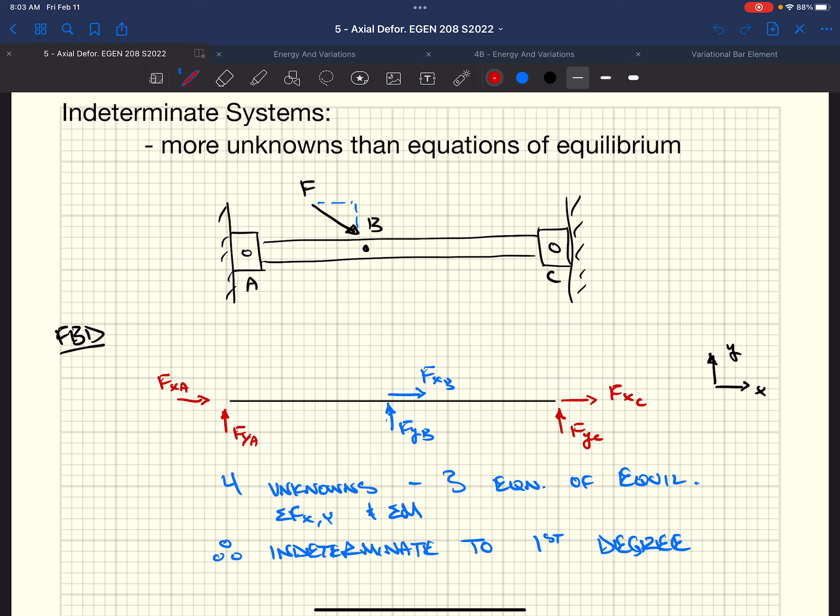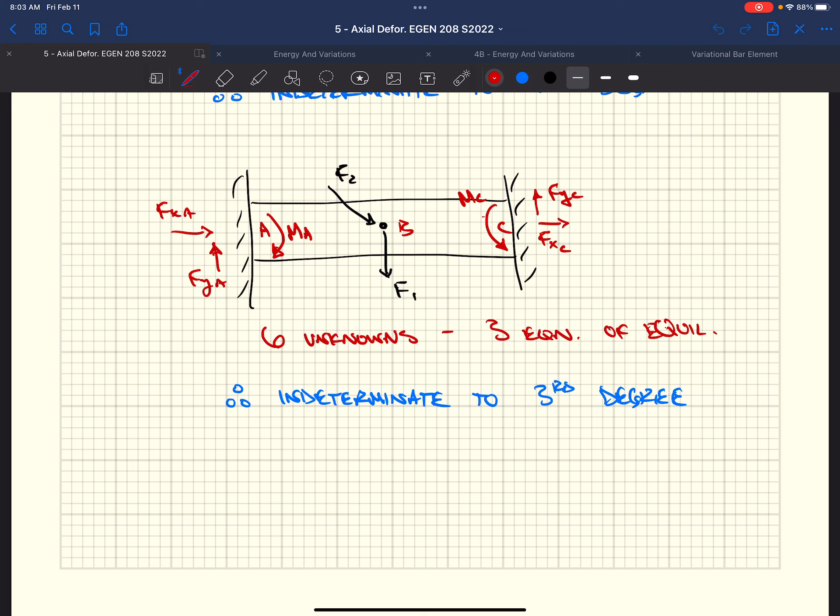To continue with what we were talking about on Wednesday, we started discussing indeterminate axial systems. We have more unknowns than equations of equilibrium. When we set up our free body diagram, we have more of our red arrows, our unknowns, versus our knowns, which are our blue arrows, our applied forces. When we have more unknowns than equations of equilibrium, we need a process to establish what these forces are. If we have 3 equations of equilibrium and 6 unknowns, we need additional equations so we can develop our unknowns.

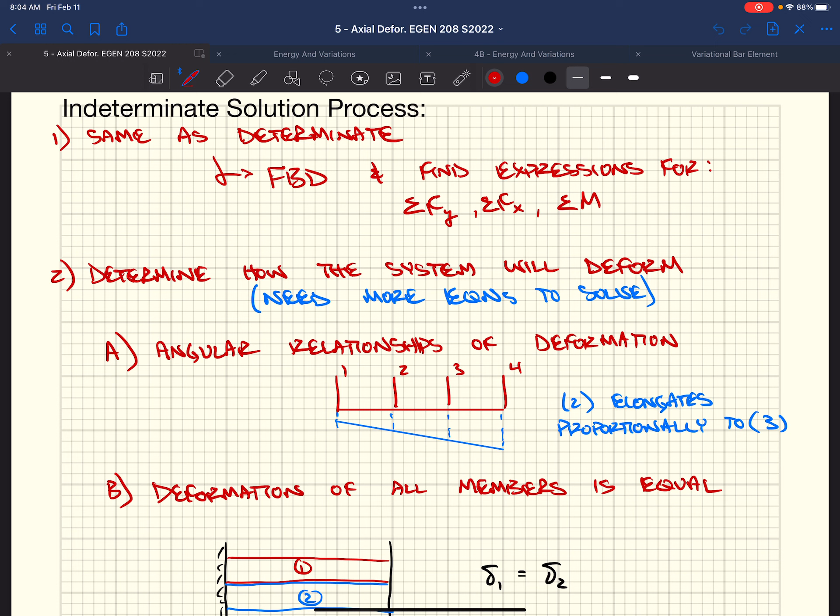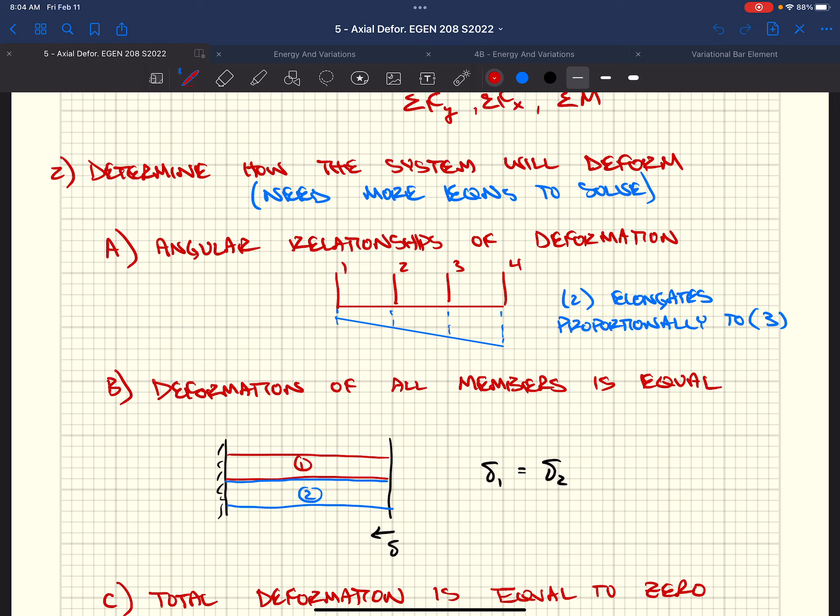So this solution process always starts with a free body diagram. We need to establish whether our problem is determinate or indeterminate. How we develop these additional equations is by coming up with relationships of deformation, because we have our force-deformation relationship equation, relating the deformation of an axially loaded element to force, geometry - length and area - and modulus of elasticity. Depending on how that rod system is set up, we can come up with relationships. If we have a rod system, we can come up with angular relationships of deformation. As each of those rods, 1 through 4, elongates, we can relate how one rod elongates versus another. If we know that deformation relationship, we can plug it into our force-deformation relationship equation and relate forces to one another.

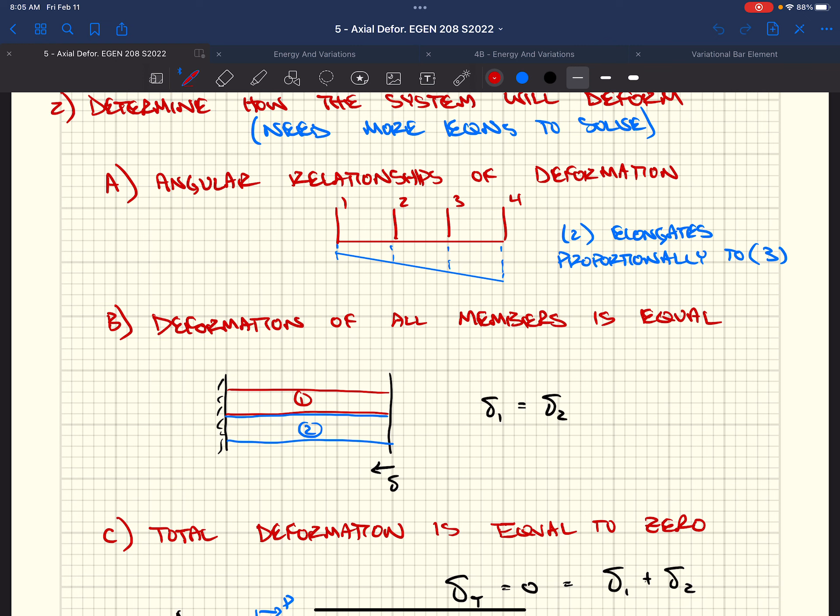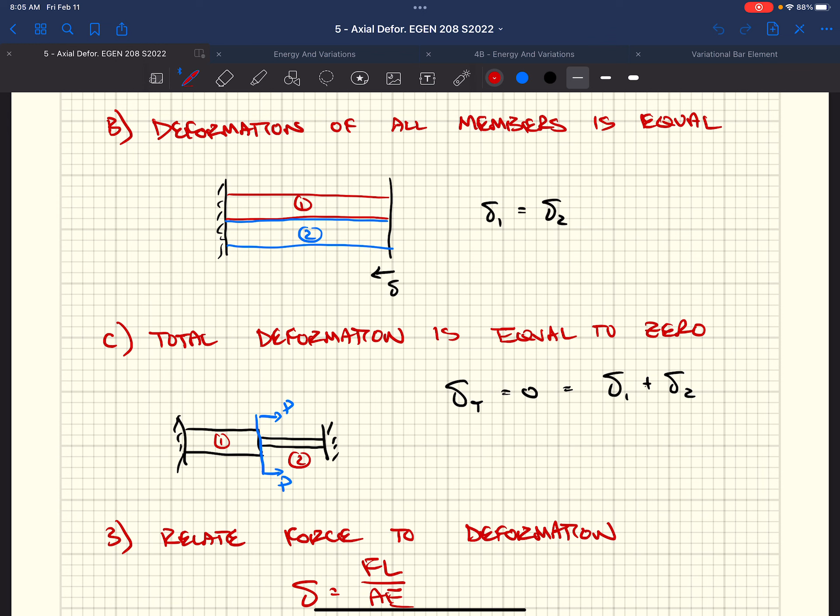Deformation of all members is equal if we have 2 elements in parallel. They might be of different materials, but they're attached to the same end plates and beginning plates - if one deflects a certain amount, the other deflects the same amount. If we have a series of rods at 2 fixed supports, and these rods were connected at a point, and we add load at that point so it moves, the overall dimension stays the same. So we know the overall change in deformation has to be 0.

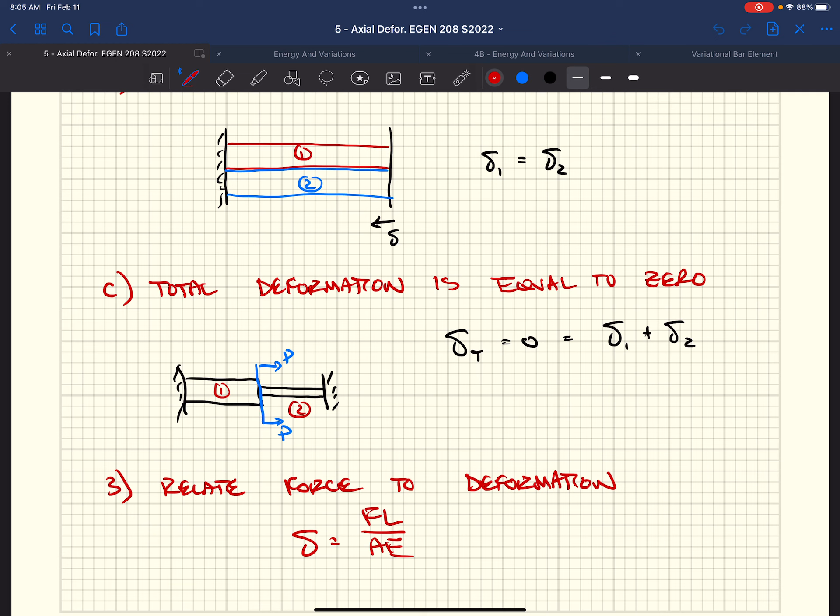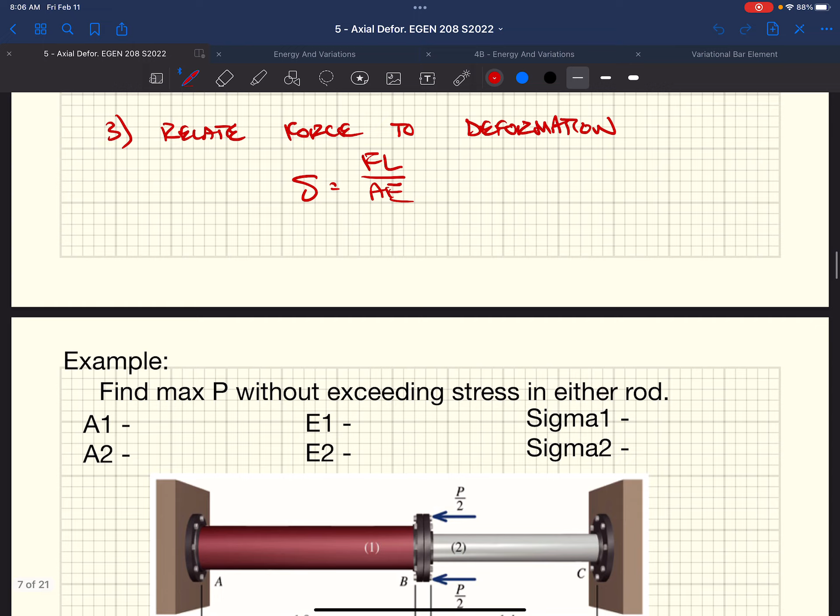If we move to the right 1 unit, our second rod gets smaller by 1 unit, but our first rod has to get longer by 1 unit, so our total deformation is 0. Once we know these relationships, we can plug them into our force-deformation relationship equation and come up with additional equations so we can solve for all our unknowns.

So this is an example - we've got two rods, just like the last one we looked at on the previous page. We have a series multi-segment rod system. The areas they're giving us are 3,600 millimeters squared and 2,000 millimeters squared.

They told us that our modulus of elasticity for our first rod is 200 gigapascals, and our second rod is 70 gigapascals. Well, that means our second rod is about a third as stiff as our first rod.

Then they said they're giving us some limiting stress. It says find the maximum force P without exceeding the stress in either rod. Well, the stress in our rods needs to be 160 megapascals in rod 1 and 120 megapascals in rod 2.

So if we establish a free body diagram, first step in our process. Don't know if this is determinate or indeterminate yet. Just gonna break out the system, put in our known and unknown forces. Well, our known forces are just really our force P, or P over 2 times 2.

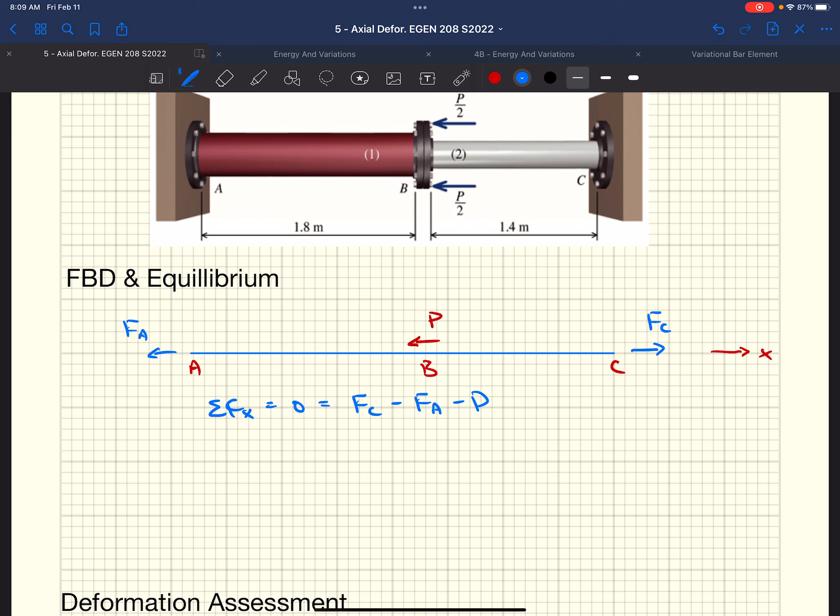They're all acting along the same line, so none of them have a moment arm, so none of those equations help us. So we get one equation of equilibrium, sum of the forces in the x. Well, I assumed that FC was off to the right, which is our positive, so it's positive. I'm going to subtract FA, because I assumed it went to the left. And then finally, I'm going to subtract P, because I also put it to the left, because we knew which direction P was acting. They give us what that direction is.

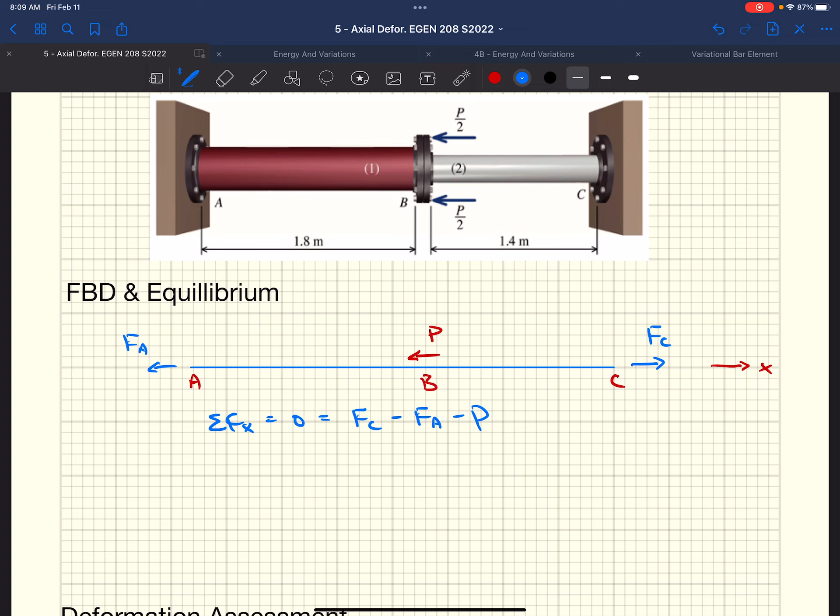Well, we have two unknowns, one equation of equilibrium. This problem is indeterminate, and it's indeterminate to the first degree.

We need one more equation, and we could solve for our forces. We need two equations for two unknowns.

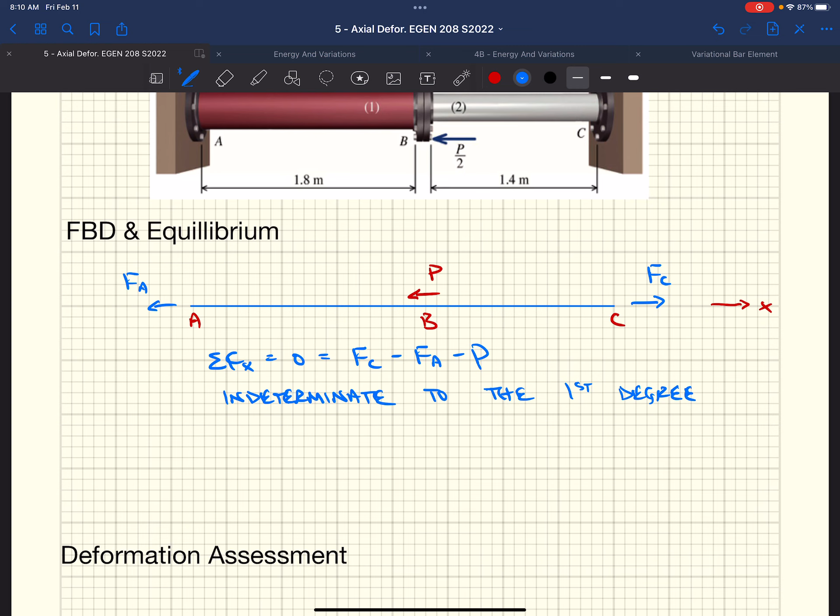I'm going to make a substitution and say FC, I'm going to just call F2, that's the force in rod 2. If I were to just, we took this out of the supports, so really this is rod 2 on the right-hand side of our applied forces. This is rod 1. So really the internal force in rod 2 is FC, and the internal force in rod 1 is FA.

Well, if we follow our solution process for indeterminate systems, we need additional equations of equilibrium, based on that list in your notes. Anybody come up with an equation that they would use to relate the deformation of our two rods in this system? Any ideas? Yeah? Yeah, exactly.

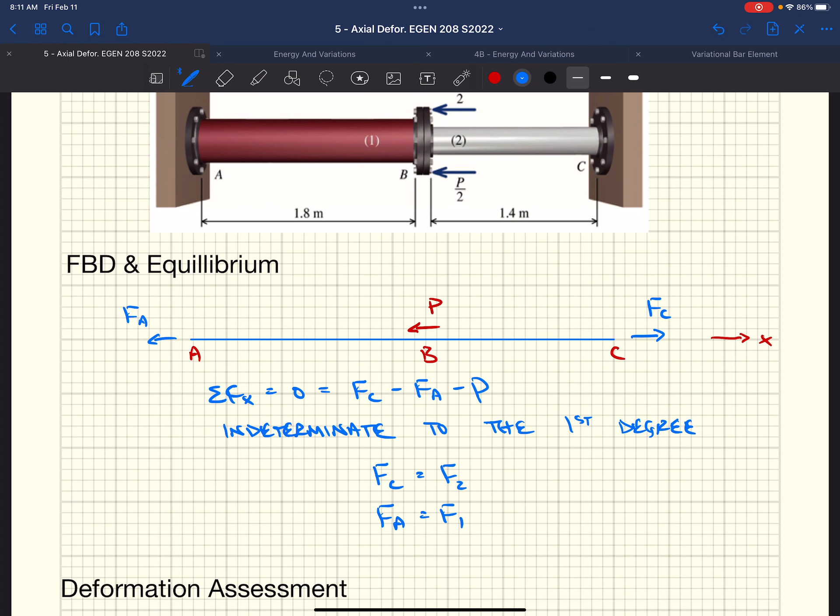Right, the total deformation has to equal 0. We have fixed end supports. So we know that our behavior of our system needs to act something like this. If that plate moves to the right, because the end plates aren't moving, member 2 is going to get smaller. Well, member 1 is going to get just as long, it's going to compensate for that loss of length in the second member. So if you add those together, we're going to get 0.

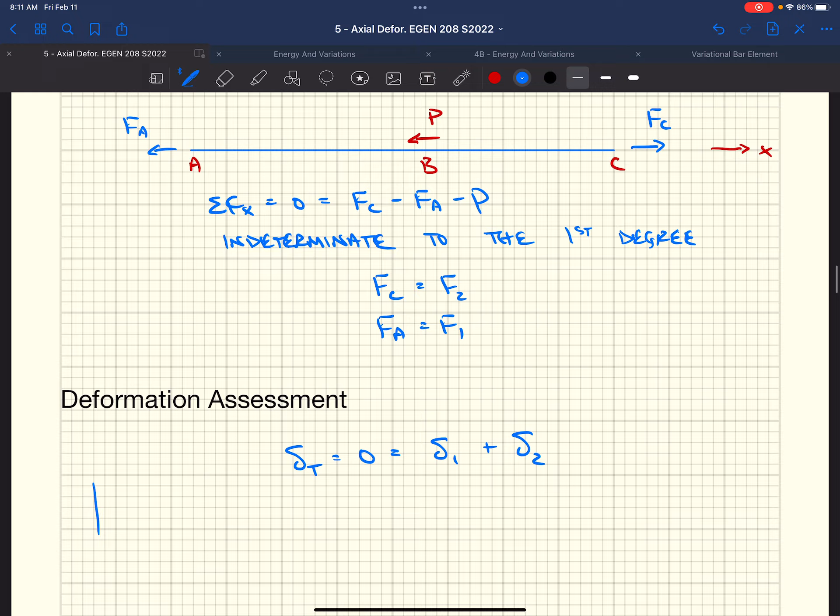So essentially, this thing going on, fixed supports, got some load P. This right here is a constant. What does that mean? Well, the total system change in length has to be that constant. That constant is 0. It's got to be 0 because it's not going to change length overall.

Well, what does that mean? Well, if we were to rearrange this, we could say that delta 1 is the opposite of delta 2. We just took delta 2, subtracted it to the other side. We'd get delta 1 is negative delta 2.

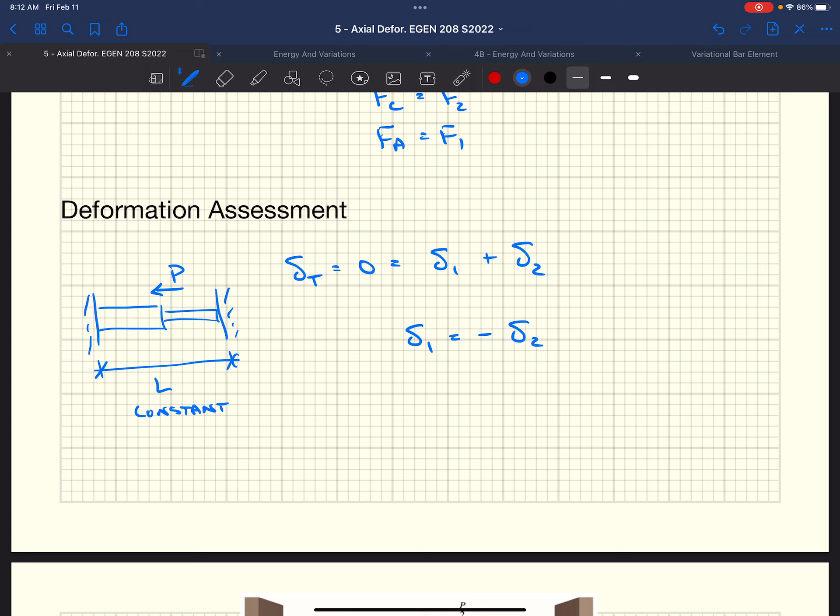Well, when we use that, now we have this relationship of deformation between the two rods. Well, we also have the force relationship to deformation of each rod. We have delta 1. Well, delta 1 is the same as saying the force in 1 times the length in 1 over the area of 1 times the modulus of elasticity of 1.

Similarly, we have this same relationship with respect to member 2's cross-sectional geometry, material properties, and internal forces.

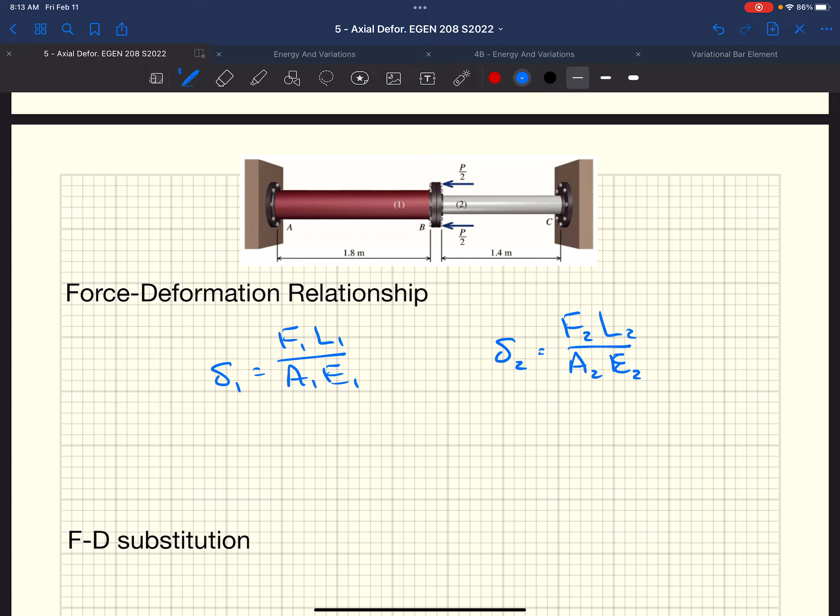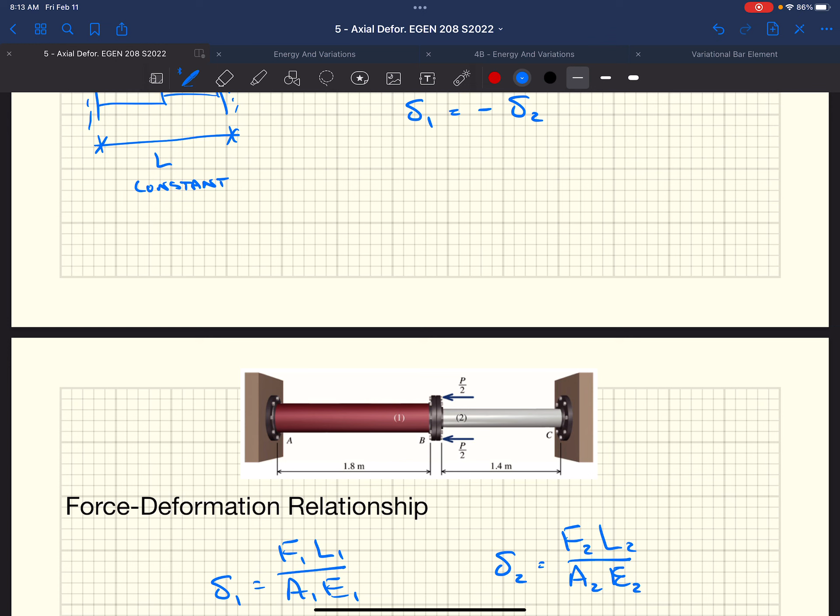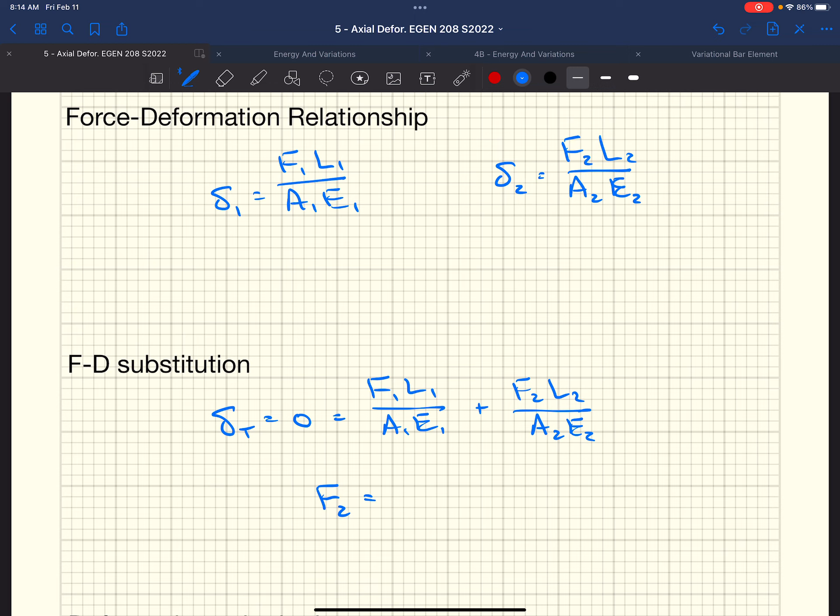Well, we have delta 1 equals negative delta 2. Well, we have delta 1 and delta 2 in terms of forces and known other parameters. I'm just going to make that substitution. I'm going to say delta total is equal to 0. Well, that's F1, L1, A1, E1 plus F2, L2, A2, E2, or if we rearranged it the way we had it, and then substituted or just rearranged as a whole for F2, one of the forces.

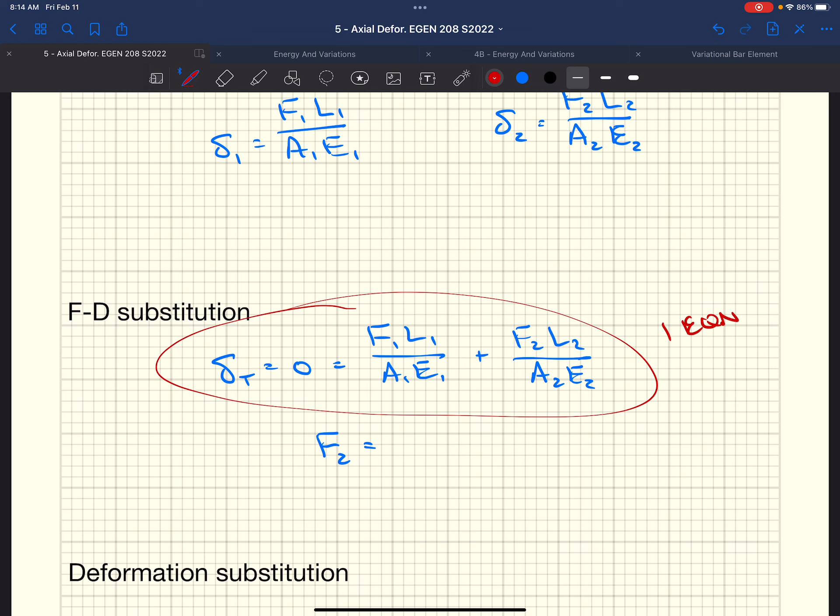This right here gives us an equation in terms of unknown forces. So this would be one equation with two unknowns.

This is our other equation with two unknowns. We know FC is F2 and FA is F1. So now we have two equations and two unknowns.

I'm going to solve this equation for one of my unknowns: negative F1, L1, A1, E1, multiplied by E2, A2 over L2.

Now that we know one force in terms of the other, based on our deformation relationship, we can substitute that force 2 back into our equilibrium equation that said our sum of our forces in the x equals 0, and that was negative F1, or F sub A, plus F2 minus P.

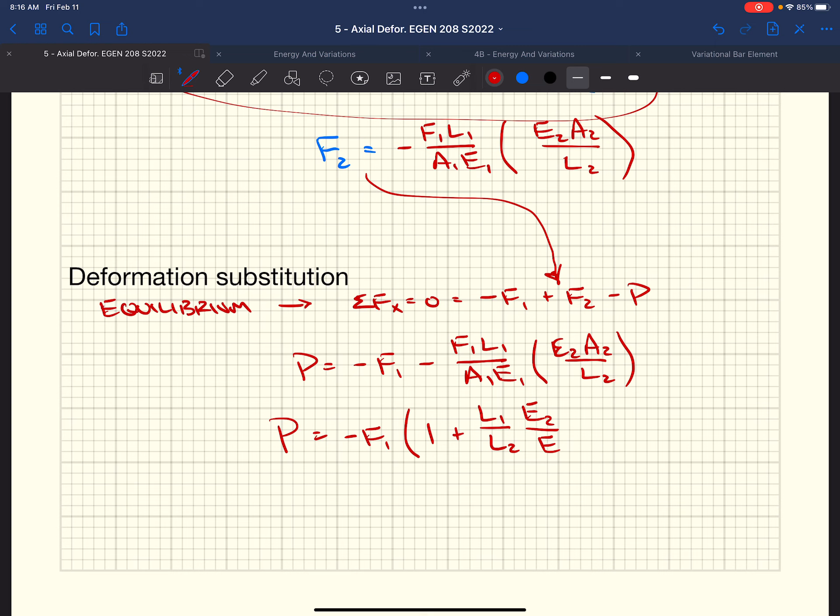Well, if we take this and plug it into there, do some rearranging, we get P equals minus F1 minus F1, L1, A1, E1 times E2, A2 over L2. Could simplify this a little bit more. Negative F1 — I'm going to pull all the F1s out: L1 over L2, E2 over E1, and finally A2 over A1.

We know our applied load. We could get our applied load based on knowing the force in one and our geometry of each of our rods, our material properties of each of our rods, and the cross-sectional area of each of our rods.

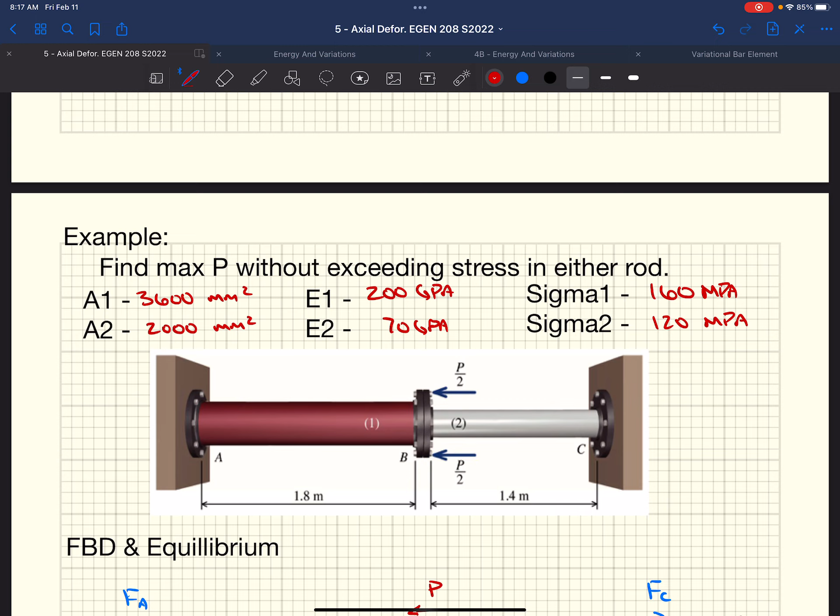Well, they didn't give us P, right? They said, what is our max P without exceeding the stress in either rod? Well, what is our equation for stress? Stress is force over area, right? It's never going to change.

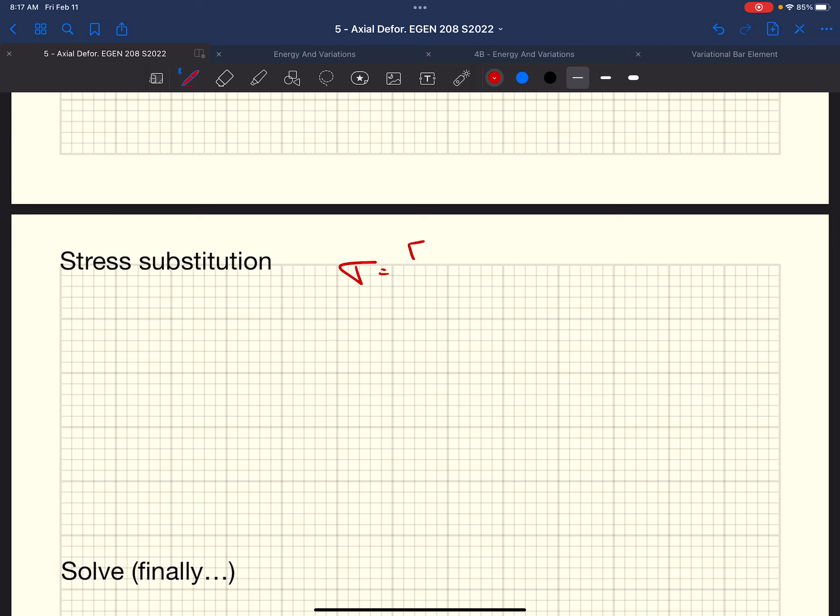This is a safe space. You can be wrong, I can be wrong. I'm wrong all the time, okay? Stress is force over area, right?

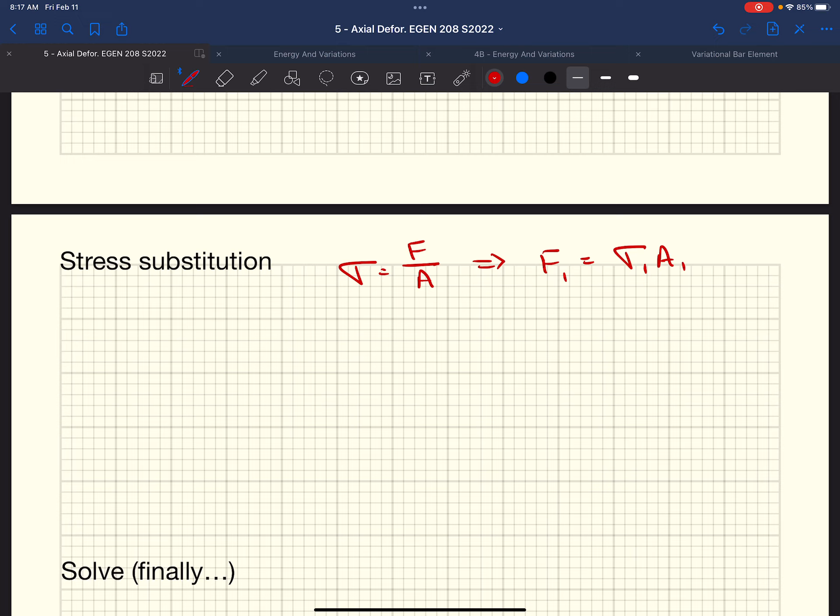So they gave us stress. We know the cross-sectional area. The only thing in that equation we don't know is force, so I'm going to rearrange for force. If we're looking at rod 1, the force in rod 1 is going to be the stress that we are limited to in rod 1 times the area of rod 1.

If we look back up here, I conveniently rearranged this so that I could take this quantity, stress 1, area 1, and just plug it in for F1. Put it up there, and create an equation in doing so. So P equals negative stress 1, area 1, or F1 — that's all that is, F1 — times that big glob of stuff.

Something like that, right? It's A2 over A1, yes, A2. Okay, well, we know everything here. We know everything on the right-hand side. We can figure out now what force we can apply where we will not go beyond — we're going to be sitting right at the maximum stress in rod 1 or member 1. So let's plug that in.

At this point we've got to start thinking about units. There's a lot of units going on in this equation on the right-hand side. We know what we want to get out is a force, so that's going to be in pounds, kips, in this case newtons, or kilonewtons, since we're in SI. So we just want to make sure we follow our units here.

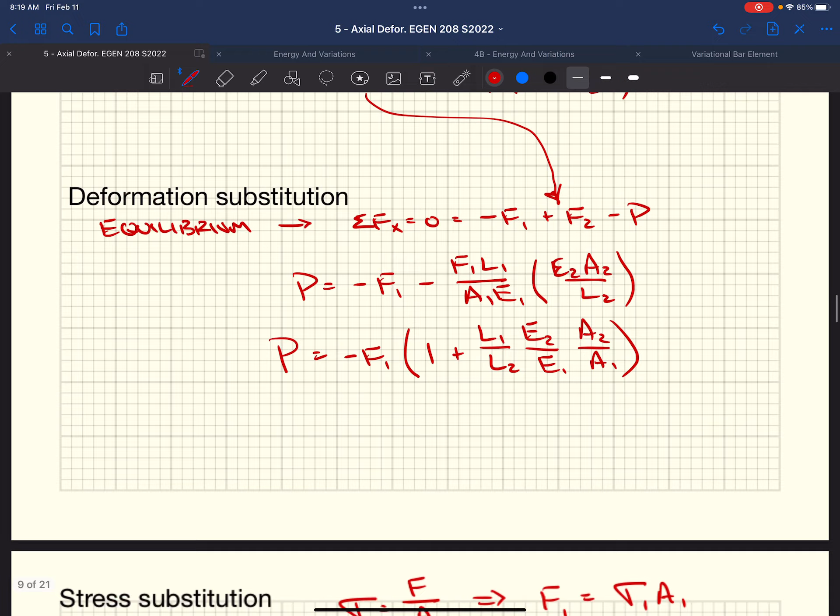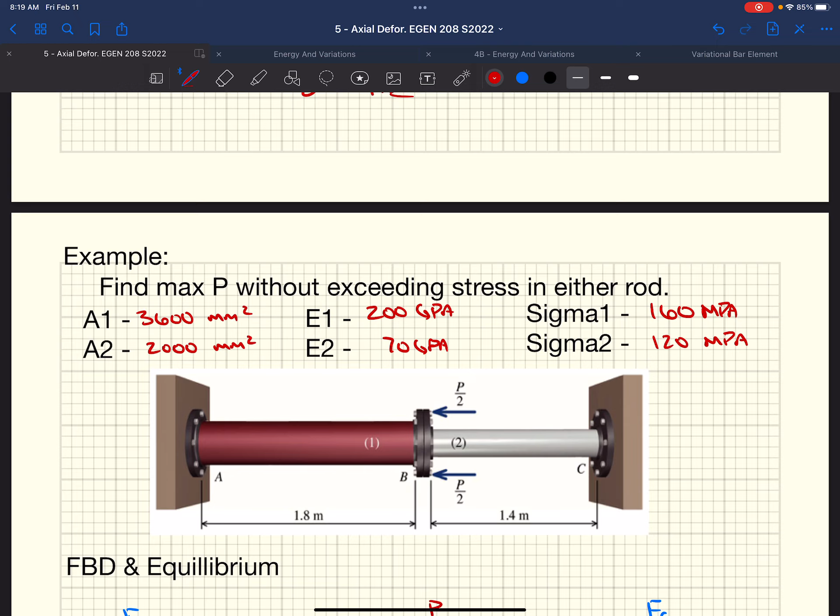Well, they told us it was 160 megapascals, 200 gigapascals, and an area of 3,600 millimeters squared — also rod 1. The length of rod 1 is 1.8 meters.

So we have 160 megapascals. Well, we know megapascals is newton per millimeter squared. We know the area that we just said was 3,600 millimeters squared. Then we've got this big mess of stuff — we've got the length of rod 1 over rod 2. It's 1.8 meters over 1.4 meters.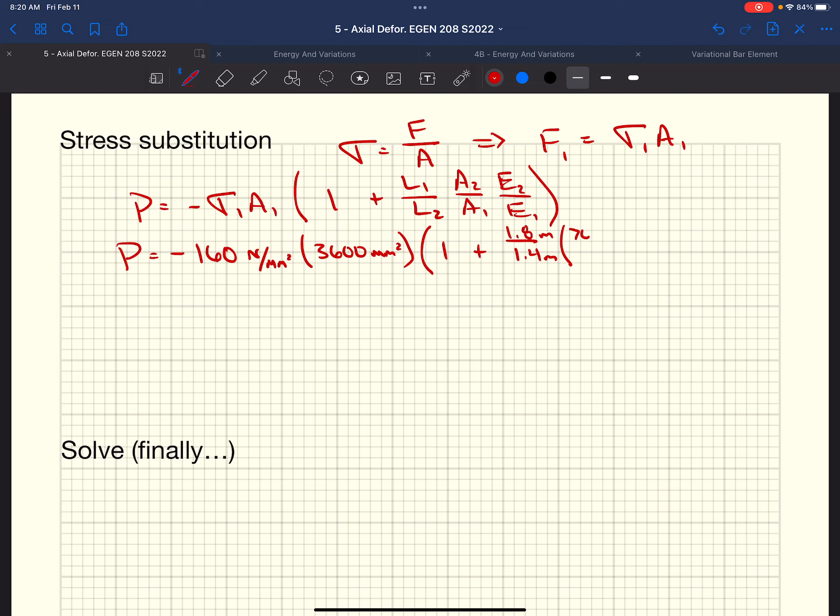And then we've got our E's. We have 70 gigapascals, that is the modulus for rod 2. And then finally the area — again, got to remember that it's area 2 over area 1, so it's 2,000 millimeters squared over 3,600 millimeters squared.

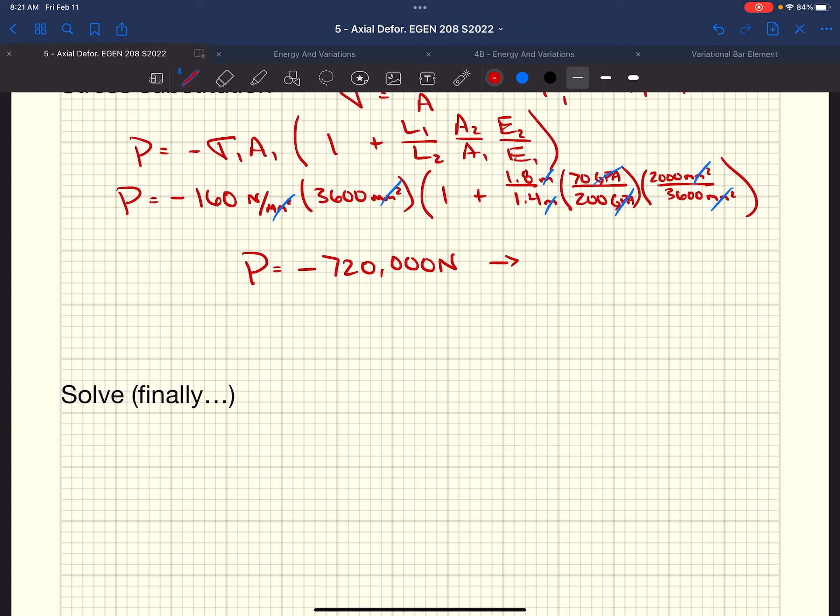If we look here, all of our units cancel on our L's, A's, and E's. If we look over here, megapascals is a newton per millimeter squared, and we had area in millimeters squared, so we were able to cancel those out. So our answer we're going to get is P equals negative 720,000 newtons, or negative 720 kilonewtons.

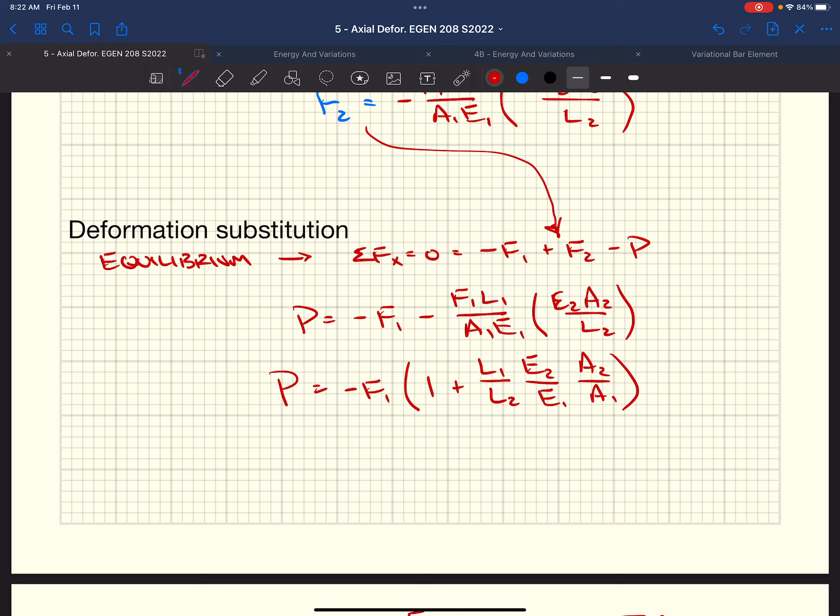Well, just like we did up here where we rearranged an equation that related P with respect to the force in rod 1, we can do the exact same thing.

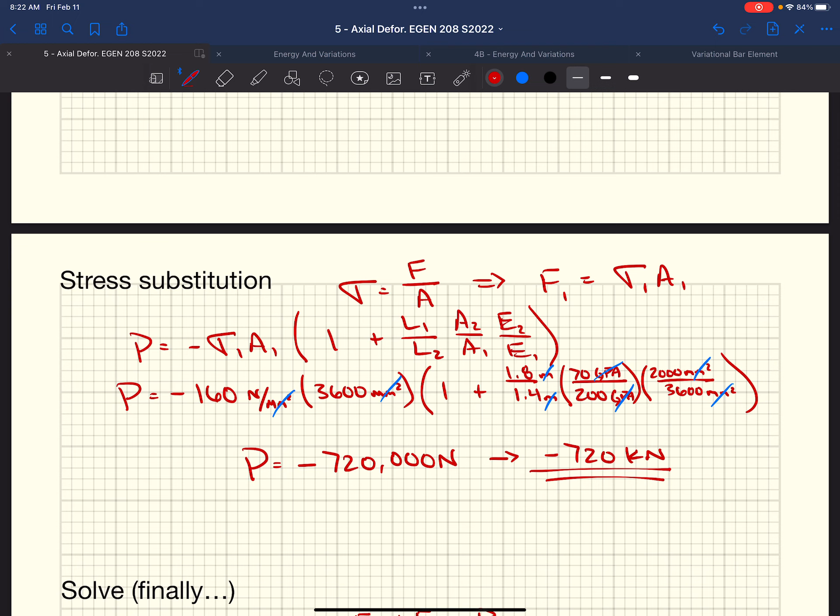Sum of the forces in the X equals 0 equals negative F1 plus F2 minus P. All the negative means is that our original assumption of direction is actually wrong, right? P is actually opposite with respect to the direction of force in rod 1. If we apply the force P that heads this way, both of these reactions should have gone this way. So all that's saying is that the direction we assumed is actually opposite of the actual direction relative to the applied load. That's why that's negative.

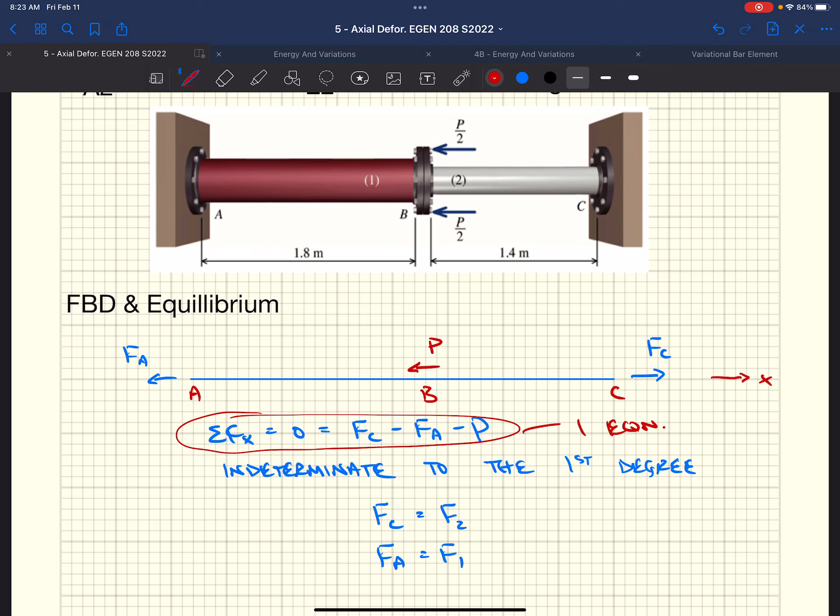So we have F1 now, based on this equation, F2, L2, E2, A2, times E1, A1 over L1 -- just based on rearranging that equation. P is F2 times L2 over L1, E1, E2, A1, A2 plus 1.

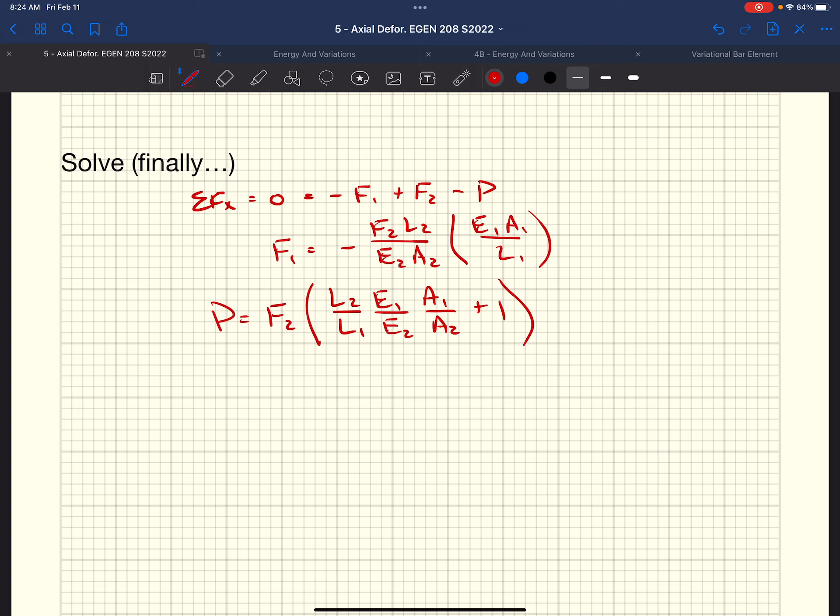And plugging all that in, which I'm going to save you guys the pain of doing, we get 1.2 million newtons, or 1,200 kilonewtons.

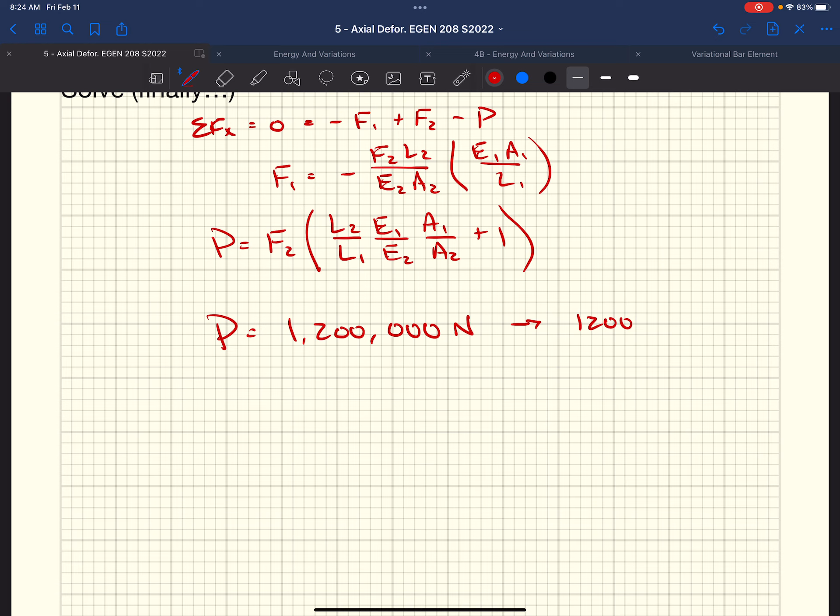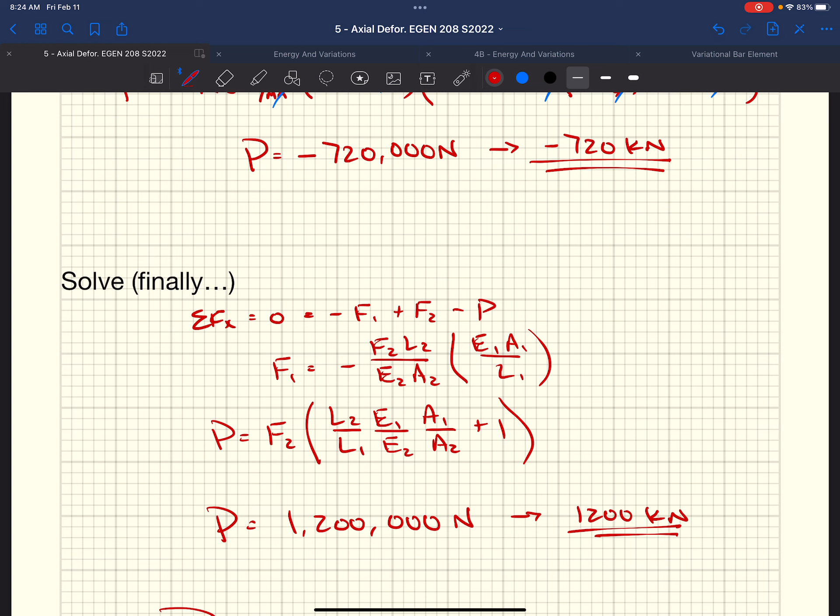It's positive. What does that mean? Well, the direction that we assumed in our initial free body diagram, all that means is we assumed the right direction. Based on this, if we put P to the left, that reaction at 2 is to the right. Based on this, they asked us for what's the maximum P that we could apply to reach our stress in each of our rods.

Which out of these two, what would be our P that we would use? 720 kilonewtons -- that is our limiting value.

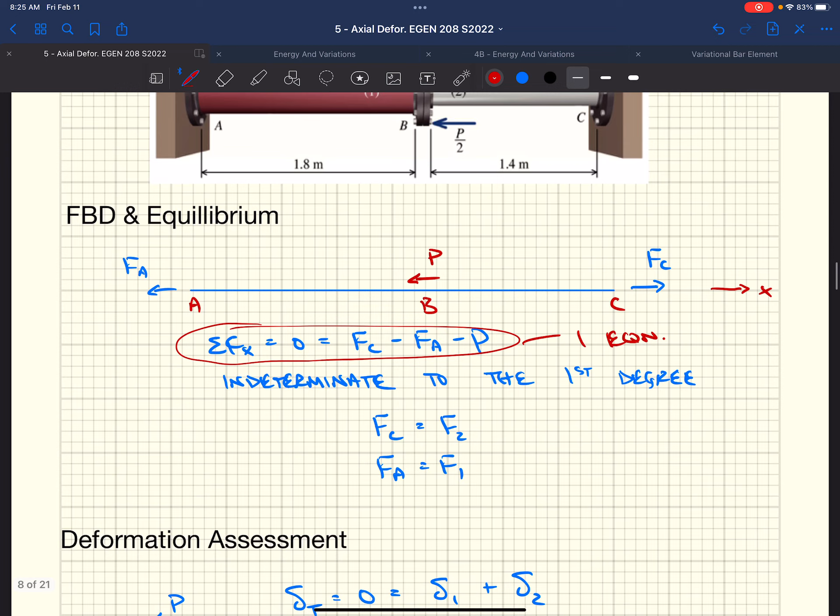That is our limiting applied load. If we started at 0 and slowly increased that load, at some point we're going to hit the limit, and unfortunately rod 1 is our limiting rod where we would hit the stress. We're going to hit 160 megapascals first in rod 1 -- essentially failing this member before we get rod 2 to its 120 megapascals.

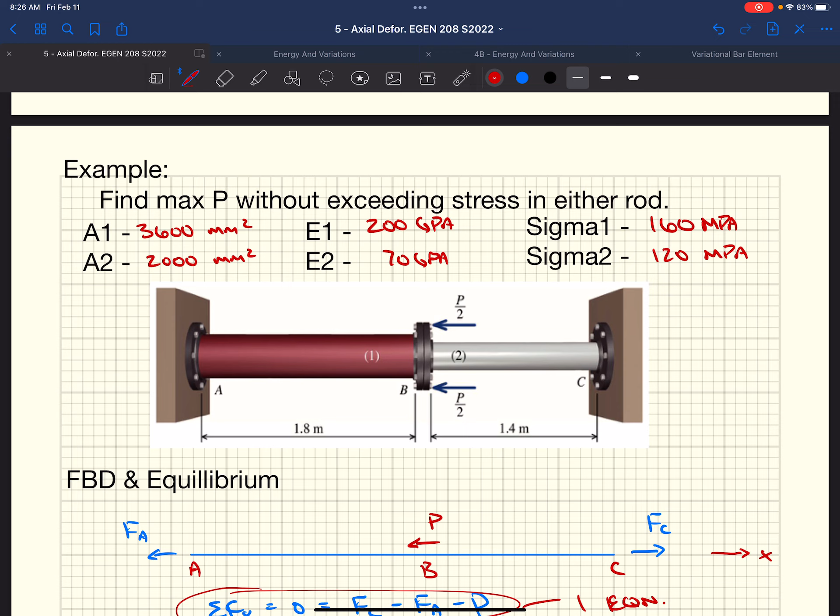Looking at this, rod 1 is larger than rod 2, but it's the fact that rod 1 is stiffer that really plays a huge role -- as you push on it, it's going to attract load 3 times as fast as rod 2 would, because it's stiffer. So for every 1 unit of deformation, you're going to get 3 times as much load in rod 1 as you would get in rod 2.

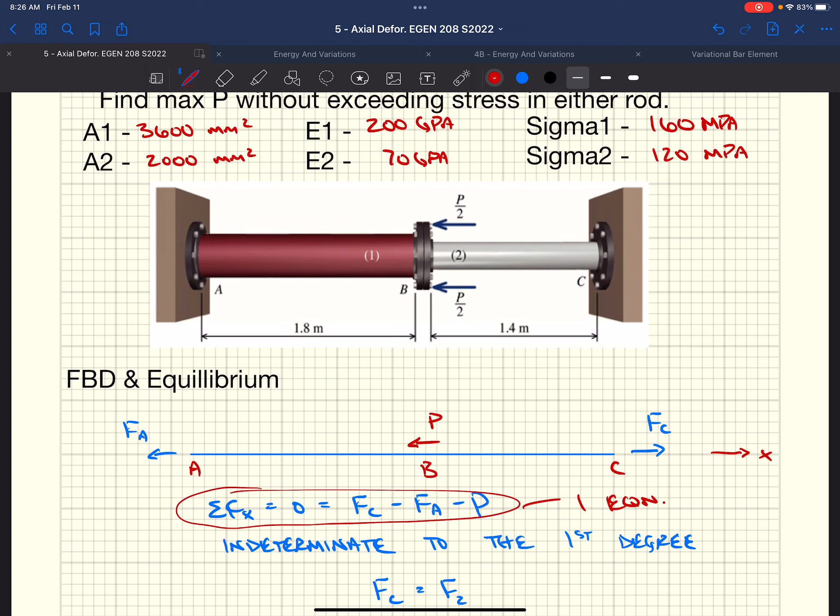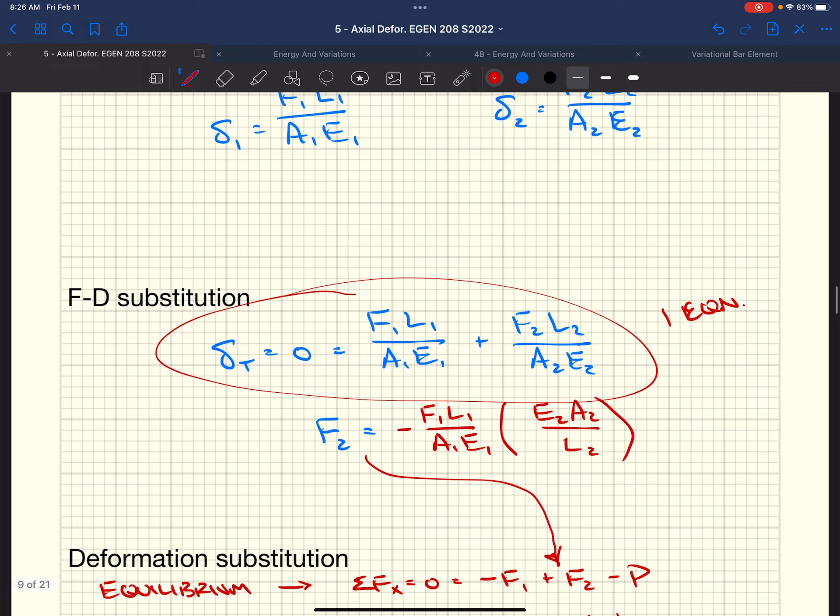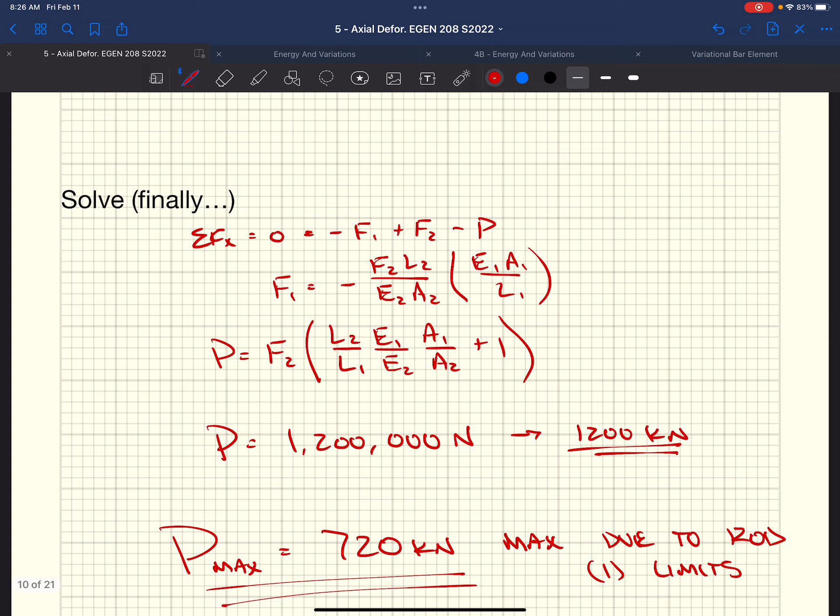So the only thing you change to get the different P -- besides all the stresses and forces -- was the calculation for F1 and F2, right at the beginning, using the stress and area for your P equation? For the second rod? Yeah, is that the only thing you changed, right at the beginning, and then all the given information you just put back in? Yes.

So you essentially take the exact same steps: from this equation here, you take our stress equation, and plug in, just like we did up there, where now we have stress 2 times area 2. Then in that case we have everything in this equation, and we just plug it in, and that would limit our force to being at our maximum stress based on all of the geometric parameters -- the area and length, and then our stiffnesses. Does that answer your question? Okay.

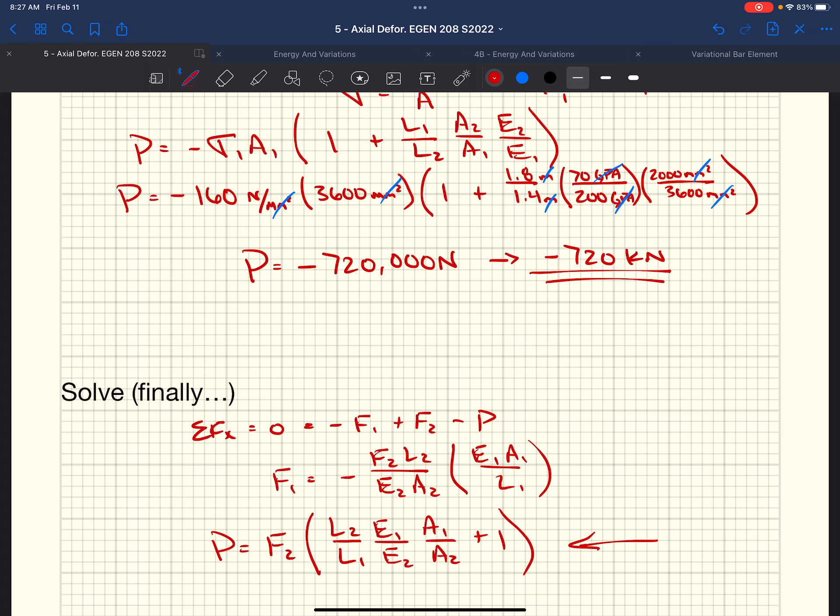All right, I'm going to go through another example here. We're going to do a kind of rod, axial rod system.

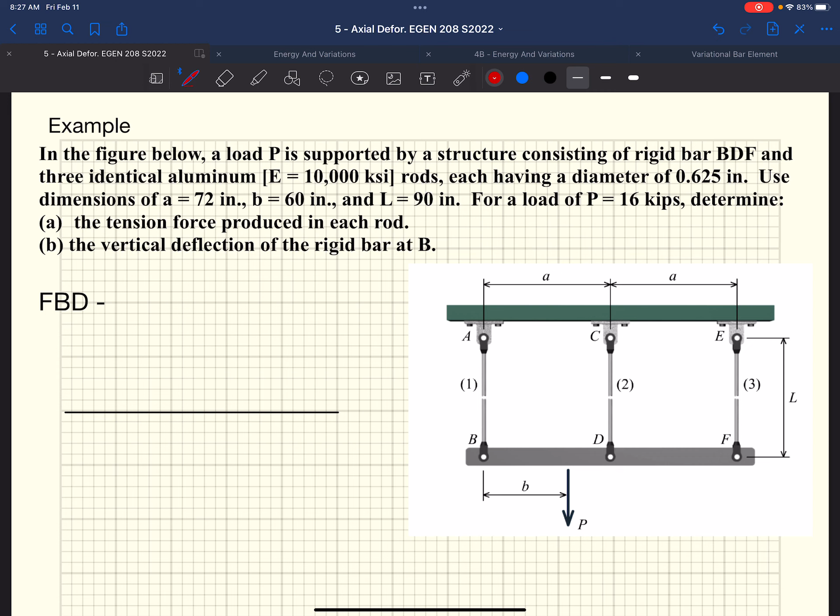So assume we had parallel running rods suspended from the ceiling. The new Big Sky High School is going to have something like this, where you had a platform suspended by multiple rods. And in this, we're applying a load P to the bottom of it -- maybe you're hanging a basketball hoop or something like that, in a gym situation.

They tell us that all the bars are aluminum, so they all have the same stiffness -- 10,000 KSI. They all have the same diameter, 5/8 of an inch. They're spaced at 72 inches, 6 feet on center. That load we're applying is 5 feet, 60 inches, from point B. And all of these rods are 90 inches tall, 7 foot 6.

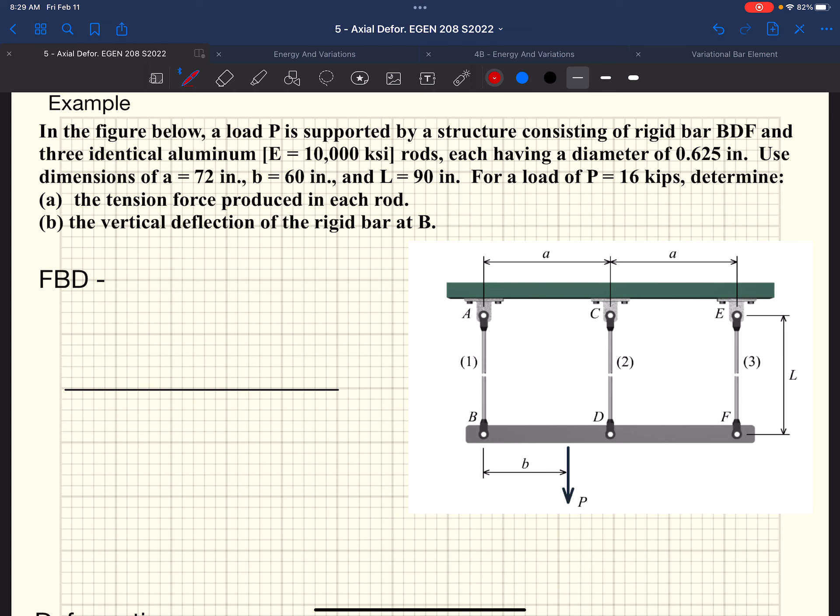For a load of P of 16,000 pounds -- that'd be one hell of a basketball hoop -- they want us to determine the tension in each of our rods, 1, 2, and 3. And on top of that, they want to find the vertical deflection of the rigid bar at B, B being that initial point, that far left point.

So you can imagine, we start out with our free body diagram, right? We want to know internal forces - what's the tension force produced in each rod? We need to figure out what we know and don't know about this system.

I'm essentially going to cut out that bar. We really want to know the tension of the rod, so I want to cut those rods out. I'm going to establish my free body diagram, right?

So we're going to have a point B. We know at the midpoint we have point D, and then at the far end we have point F. I want some sort of coordinate system, so I'm going to do positive X to the right, positive Y straight up.

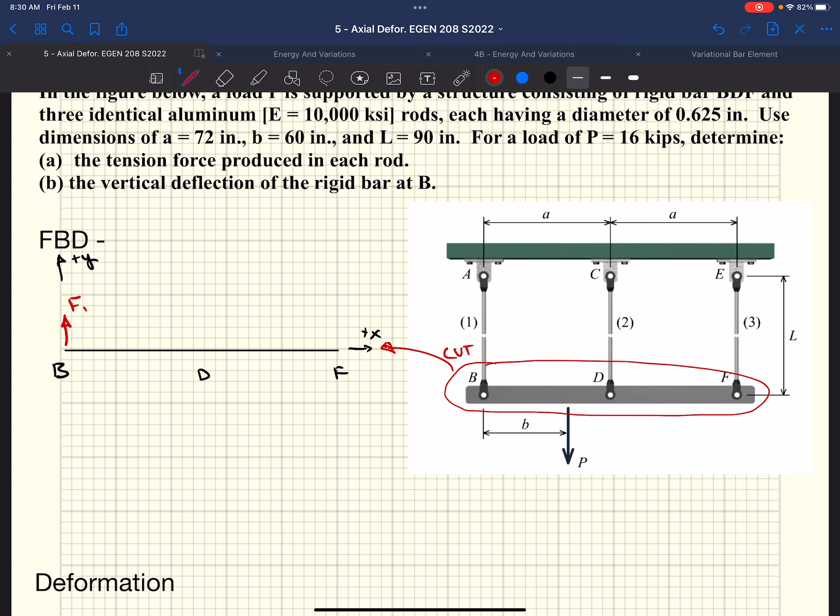We've got some unknown forces acting on this bar, right? We're going to have some sort of force in each of our rods. I'm assuming, based on looking at this, if the load is downward, each of these rods should be pulling up on the bar to hold it up. So I'm going to assume that these things are in tension, pulling up on our bar. So we have F1, 2, and 3, right? Unknown forces, don't know what they are yet.

We need some dimensions. Well, this we know is 72 inches, and this we know is 72 inches. We also have this known load, P, say it's 16,000 pounds, 16 kips. And we know that it is acting at 60 inches from point B.

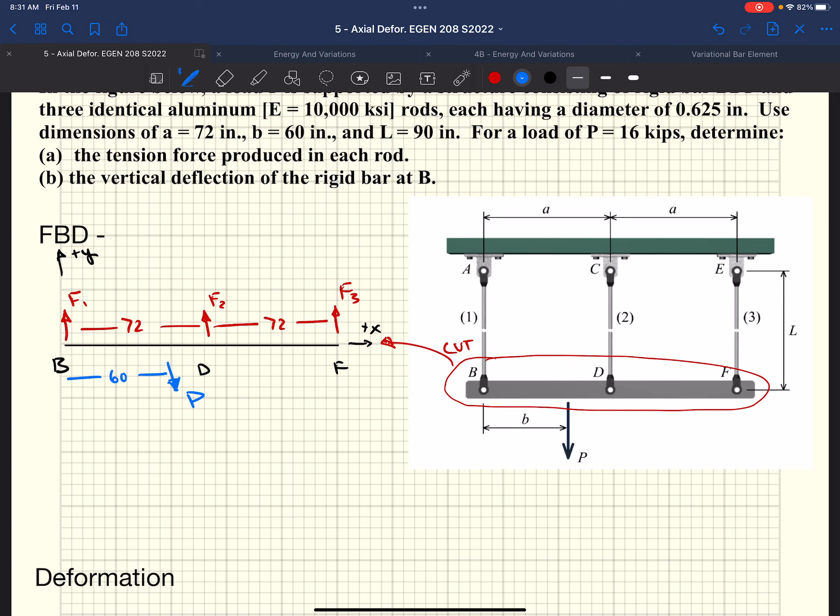So we have a coordinate system, we've imposed our known and unknown forces, right? Unknown being everything in the rods, the known being our basketball hoop or that 16,000 pound point load, okay? And then we have coordinates, right? We need to establish direction, give ourselves our positives and negatives on our forces.

So based on this free body diagram, what is one equation of equilibrium we could use? Sum moments, okay, that's a great one. If you're going to pick a point to sum moments about, which one would it be? B. Sweet, that's exactly what I guessed. I like that. So we could sum the moments about B. Well, we know the sum of the moments equals 0.

Well, we have F2, right? If we started at the left-hand side, we're summing the moments about B. Force 1 has no moment arm, right? So there's going to be no moment associated with force 1, knocks it out of the equation there. Force 2 does - right-hand rule, curling your fingers, thumbs out of the page, it's going to be positive. So F2 times its moment arm. I'm going to keep it in our alphanumeric form, so A. We know that it's 72 inches, but I'm going to keep it as A for now.

Secondly, we've got force 3. Same thing, except now it has twice the moment arm, or 2A. Finally, we have our applied load. It's going to have a negative right-hand rule, and its moment arm is its distance B - the perpendicular distance between the point that you are summing moments about to the applied force.

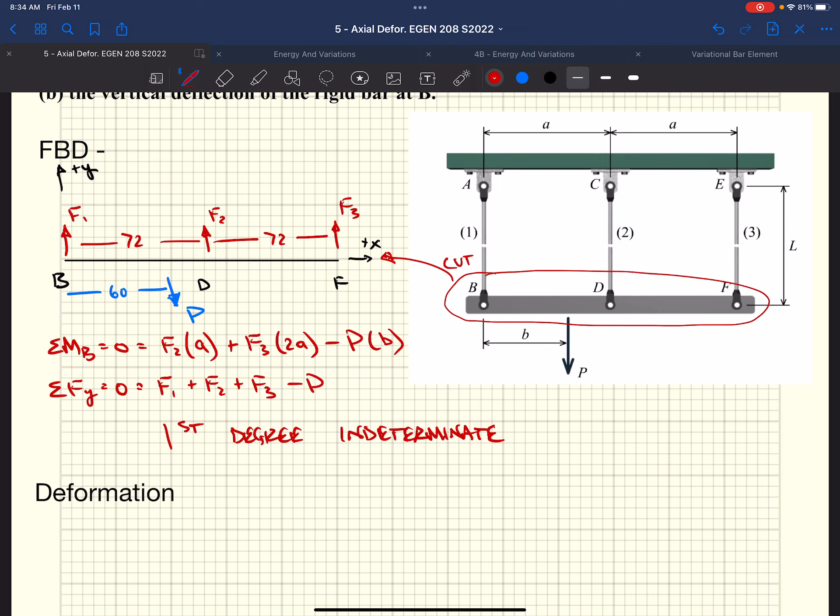So which one would you use? So yes, I guess P is known, right? They're giving it to us as 16 kips. Even though, yes, I put it in here as P, I'm just doing it so we can see, alphabetically, variable-wise, where each thing is landing in their contribution.

So you could say that the first equation has two unknowns, the second equation has three unknowns, but overall, from a system of equations standpoint, we have two equations, but we have three unknowns as part of those two equations, and so we cannot solve, right? We could, like in summing the moments, solve this equation - we could say F2 equals some blob that's a function of F3 and P and A's. Well, if we took that F2 that we did and then solved for F3, we plug it into here, so now we have one equation with F1 and F3. We can't solve that, right?

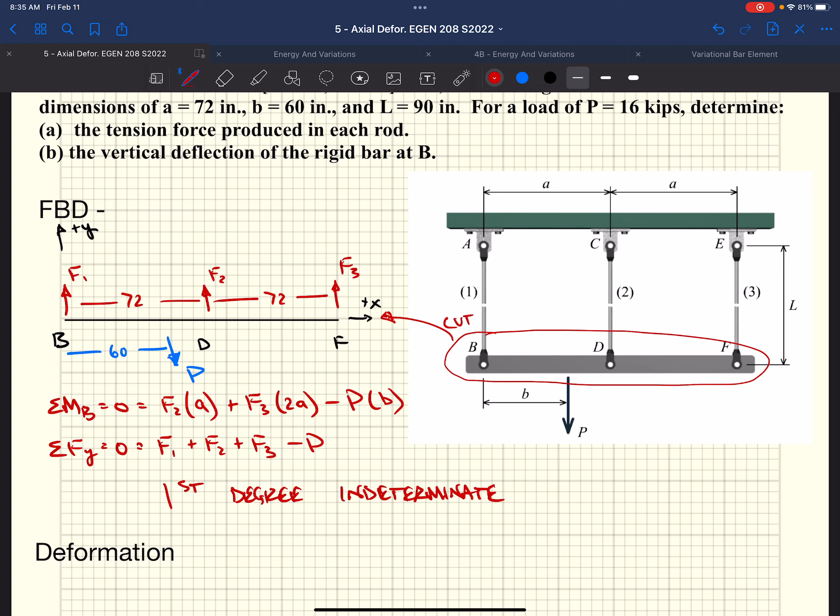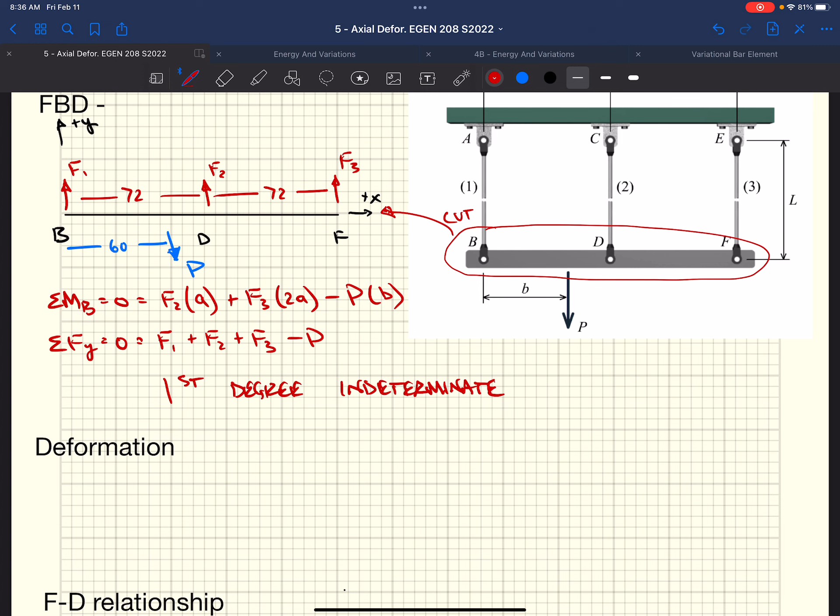P is known, and our unknowns are F1, F2, and F3. We only have two equations, so we cannot solve for those unknowns. So we need to figure out what's going on with respect to deformation. We really just need additional equations that relate forces. The benefit to us is that we have an equation that relates deformation to forces, so we need to come up with a relationship of what's going on with respect to deformation.

If I looked at that free body diagram, and really the original problem, if we pulled down P assuming that bar is rigid, it's not going to deflect and bend based on that 16,000 pound point load. It's going to be a straight line. When it starts, it's going to be flat, something like that. And when we're done applying that point load, it's going to rotate and deflect, something like that.

The P is not symmetrical, so you can imagine P is going to influence rods 1 and 2 more than rod 3. So those two rods are going to deflect more. It's going to do some sort of rotation. This would be what we would call the deflection at 1, deflection at 2, and deflection at 3. Each of our 3 rods, they're all going to deflect.

This distance is all the same, this is A and A. If we have a straight line that connects 1 and 3, and our distance between rod 2 and rod 3, and rod 2 and rod 1 are the same, that means we're at the midpoint. We're always going to be at the midpoint of this straight line.

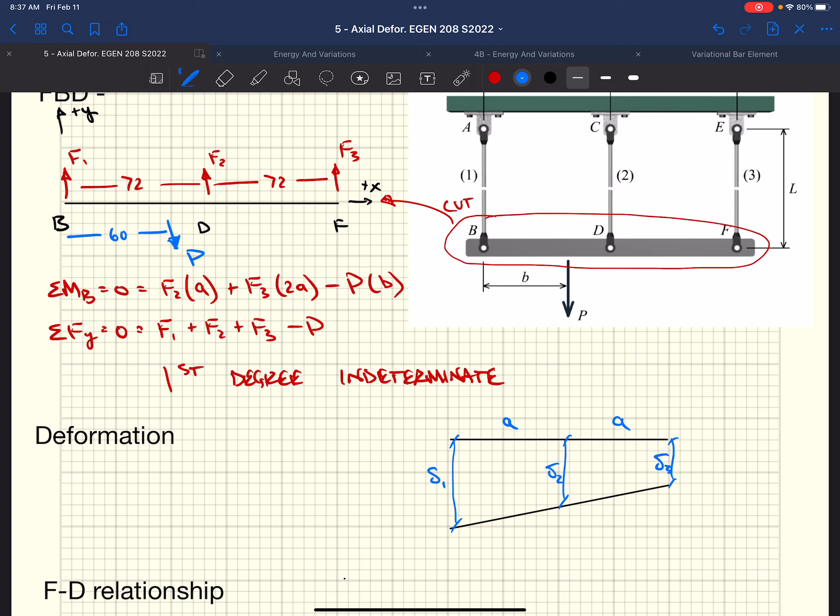Anybody think about what we could say about the displacement of rod 2 in terms of rod 1 and 3? Proportional, it is proportional. I might say it's the average. If this was always a straight line, no matter how far this thing deflects, because the fact that rod 2 is halfway between rods 1 and rod 3, rod 2 is always going to be halfway the displacement between rods 1 and rod 3.

Everyone believe me there? So in order to get that, I'm just going to take the average, add up the displacement of rod 1 to rod 3 divided by 2. Well, if we want to get rid of some of the fractions, we could just say rod 1 plus rod 3 displacements equals 2 times the displacements of rod 2. Just essentially taking the 2, multiplying it to the other side. We get 2 times the displacement of rod 2 equals the displacement of rod 1 plus the displacement of rod 3. Everyone trust me there? Okay.

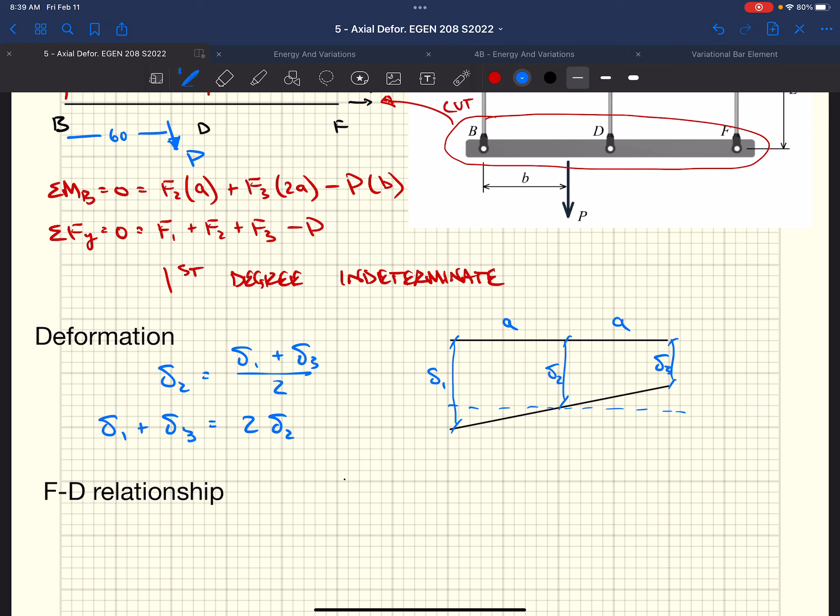Just like we did in the last example, next step is, well, we have this deformation relationship. We know we want to get forces. We need a relationship of forces so we can have another equation that we can use to get 3 equations, 3 unknowns. We know displacement of 1 is F1, L1, A1, E1. Right, we have these 3 relationships that give us the displacement of each of our rods in terms of the geometry of our rod, our material properties of our rod, and the internal force in our rod.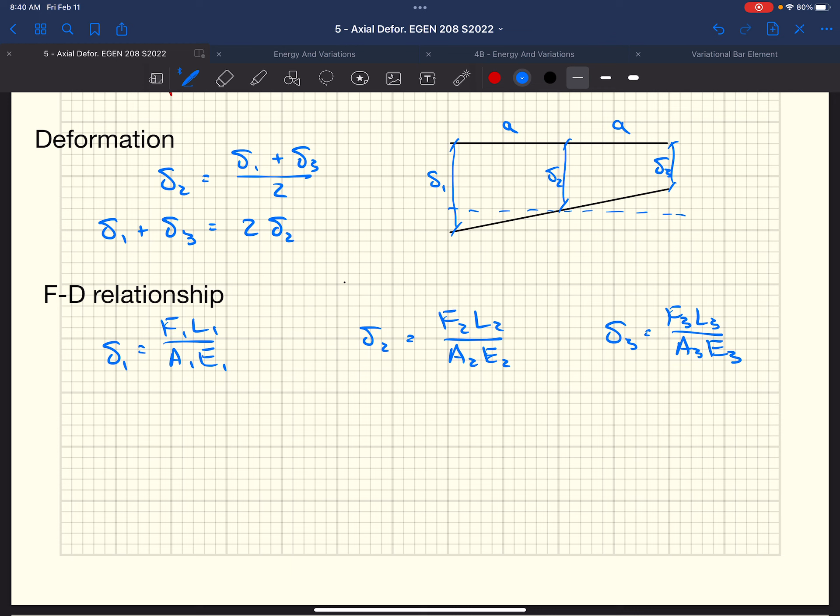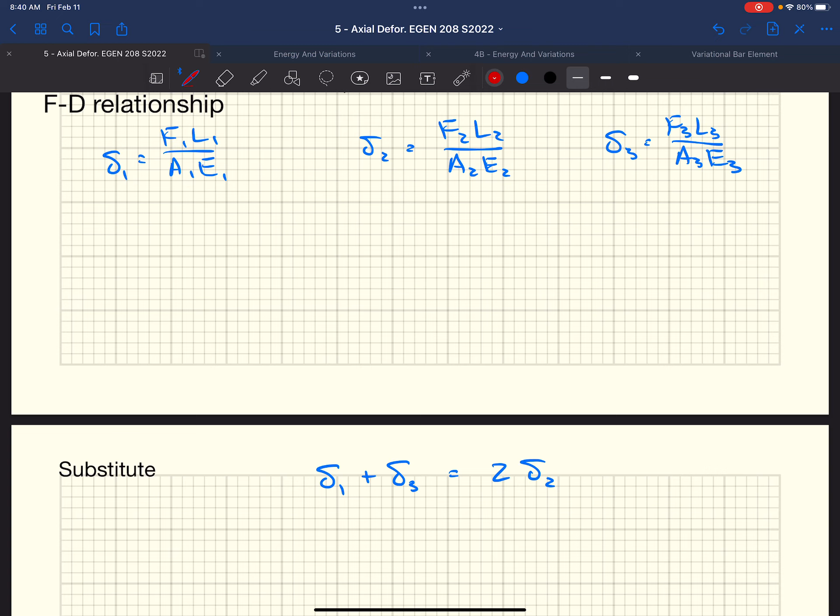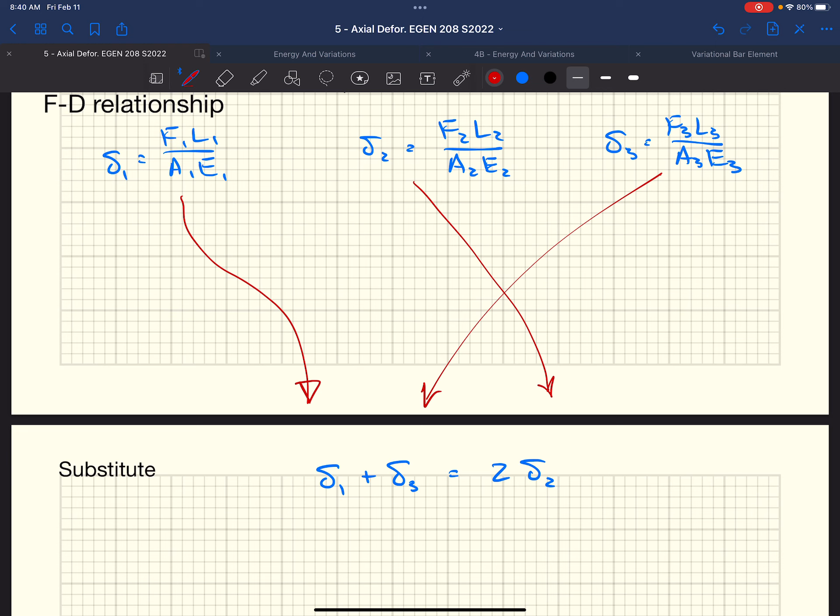Well, we have this substitution we need to do. We have rod 1 displacement plus the rod 3 displacement equals 2 times the displacement of rod 2. What do we do here? Well, we just substitute in all of our deformation equations into that equation. So now we get F1 L1 over A1 E1 plus F3 L3 over A3 E3, equals 2 times F2 L2 over A2 E2.

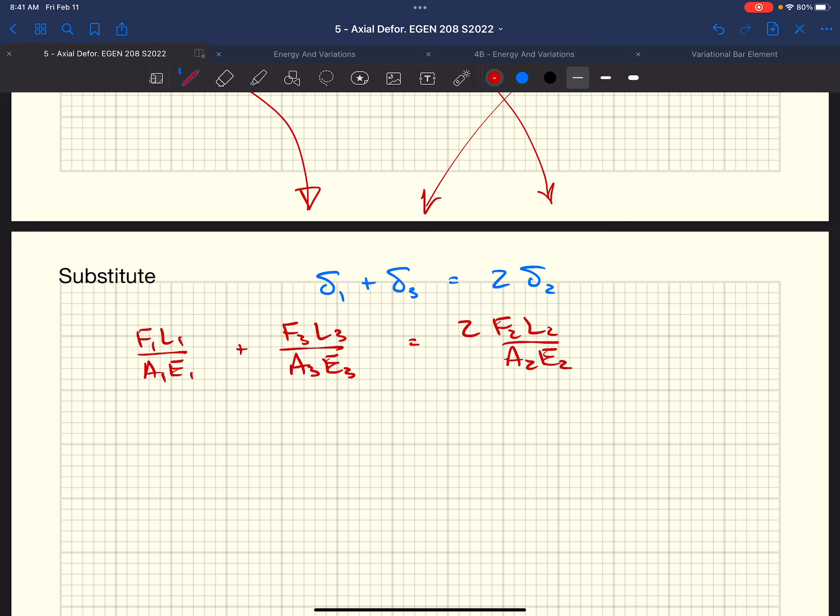Well, lucky for us, L1, L2, L3 are all the same - they were 90 inches long. A1, A2, A3 are all the same - they're all 0.625, or 5/8 of an inch in diameter. And they're all made of aluminum, so E1, E2, E3 are all the same. Well, what does that mean? That means we can just pull out all of those, and our equation then becomes F1 plus F3 equals 2 times F2.

All of that substitution, all it was for was we really wanted this: an equation that gives us forces in each of our rods and a relationship between those forces, so that we can use our equations of equilibrium. We have this sum of the forces in the y: that is F1, F2, F3 minus P. We had sum of the moments about point B, the left-hand side of our rigid bar: F2A plus F3 times 2A, minus P times its moment arm, which was B. So this is our deformation relationship, and these were our equilibrium relationships.

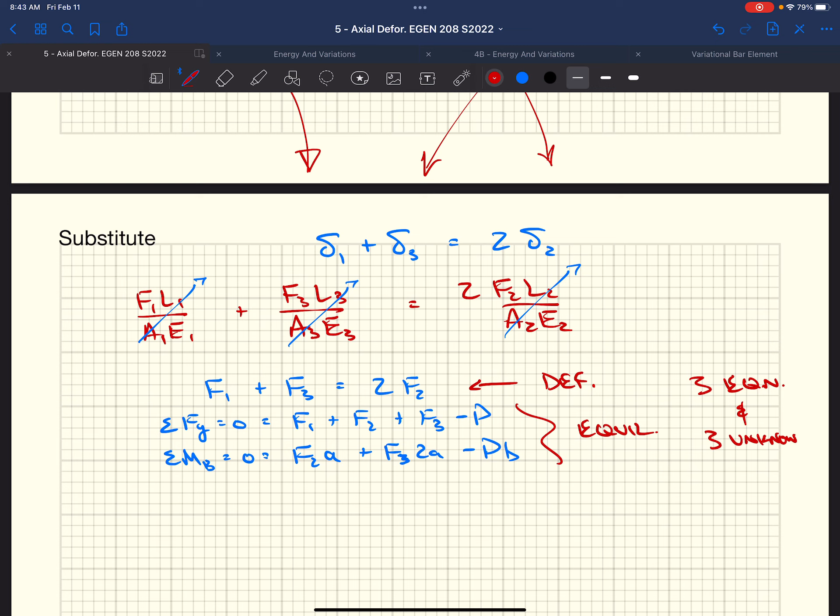Wow, I need to learn how to spell. Knowns. Right?

We can solve this. I'm going to start by using the sum of the forces in the y. Could do this in a number of ways. What do we do here? We could say, we could rearrange this and say, our deformation equation: F1 plus F3 is 2F2.

If we look at this equation, sum of the forces in the y, we have F1 plus F3, so we really have 2 F2s. So this becomes 2F2 plus F2 minus P, or 3F equals P. So sum of the forces equals 0: 2F2 plus F2 minus P equals 0. That means F2 equals P over 3.

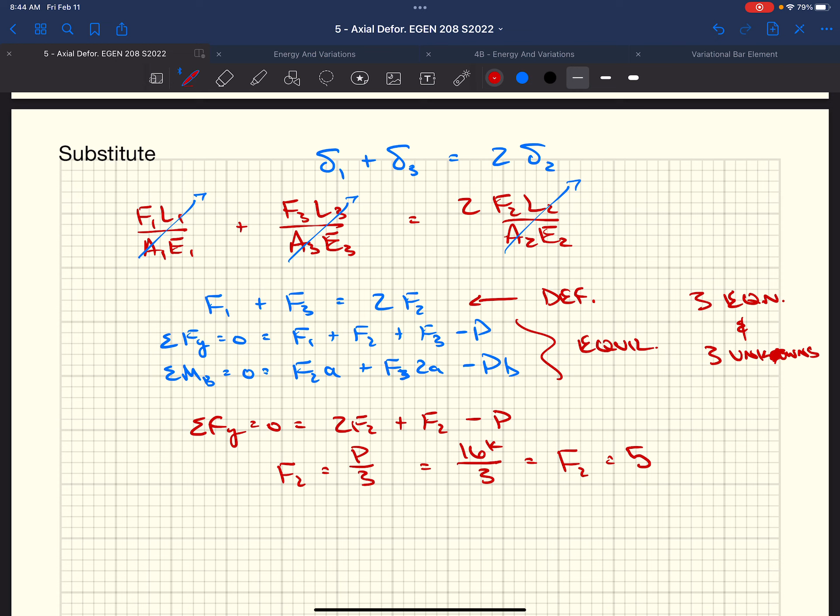They gave us P, that was 16 kips. I'm going to divide that by 3. So we can say F2 equals 5.33 kips.

Out of our 3 equations we have, yeah. Can you explain how we only got... oh wait, never mind, I see. Got it? Got it, okay. You don't have to have it, you can ask. No, I got it, I was wondering how we got only the one 2F2, but it's the F1 plus the F3, we just substitute. Yep, so we took the first equation, just plugged it into the second equation, got rid of 1 and 3, got 2F2 out of it.

So now we have 3F2, right? We have F2 plus F2 plus F2 minus P. We get F2 is P over 3, or a third. That's 5.33 kips.

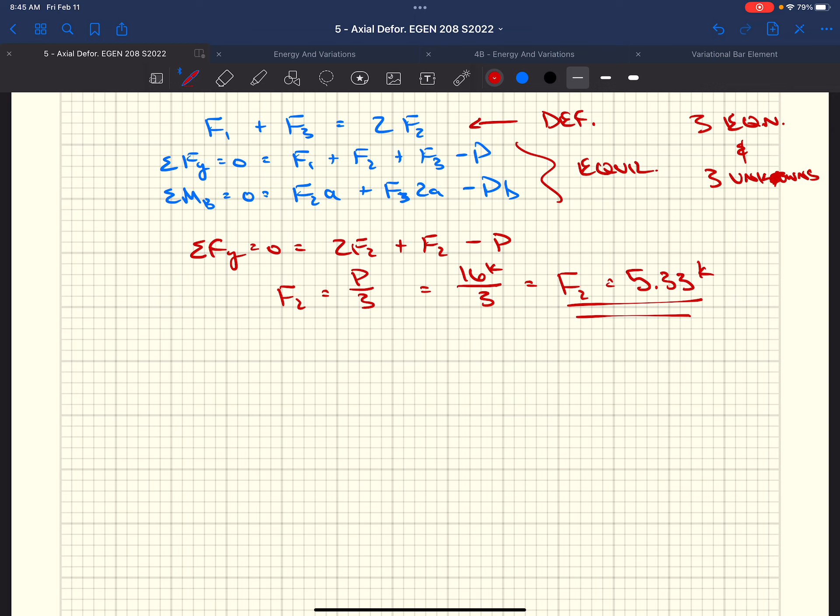Well, now that we have F2, the equation that would be nice up there is the sum of the moments about B. It's only a function of F2 and F3. If we know what F2 is now, we can plug it into that equation and figure out what F3 is.

So sum of the moments about B equals 0. Now we have P over 3 times A, that's F2, plus F3 times 2A minus P times B. If we plug in all of that stuff: A was 72 inches, B was 60 inches, P is 16 kips. We can just solve this for F3, and we're going to get that F3 is 4 kips.

That's easy enough. Now we know F2 and F3. We have our deformation equation, or even our sum of the forces in the y equation, has all 3 of our unknowns, so we can plug in the values for F2 and F3 and figure out our last unknown, which is F1. So F1 plus F3 equals 2F2, or F1, if we rearrange this, is 2F2 minus F3, or 2 times 5.33 kips minus 4 kips. That means F1 equals 6.67 kips.

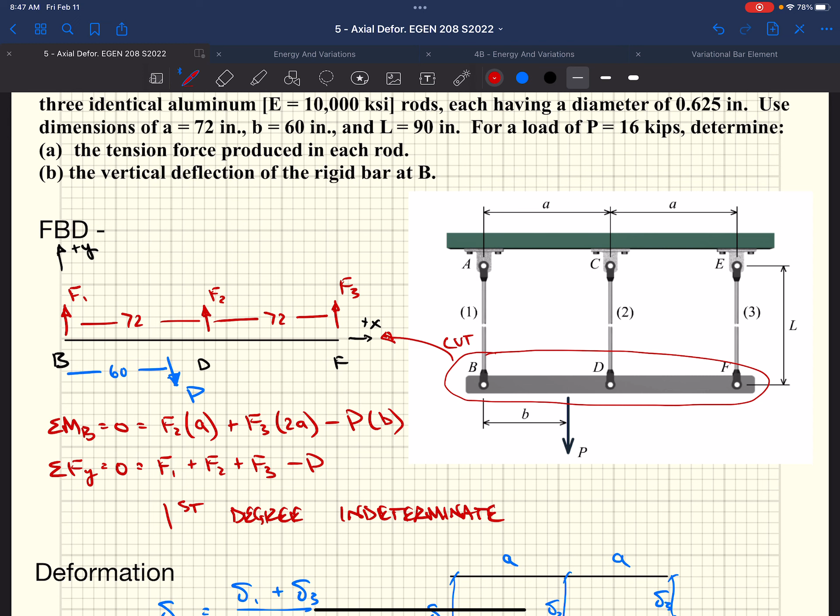So those are our answers to part 1. What were our internal forces? Well, they asked for one last thing: what is the displacement at B? The displacement at B is going to be the displacement, or change in length, of rod 1.

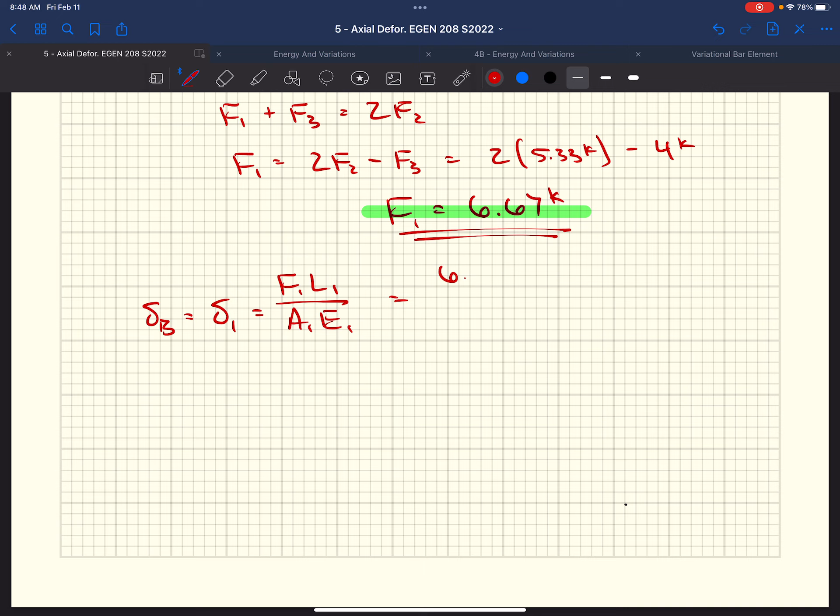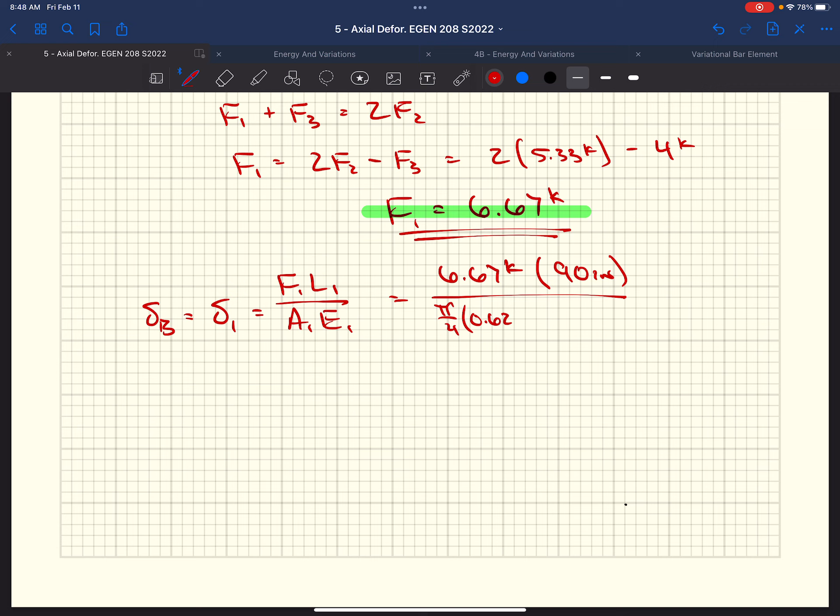We know the equation of displacement at B is the displacement at 1, which is F1, L1, over A1, E1. F1 is 6.67 kips, L1 is 90 inches, A1 is pi over 4 times 0.625 squared. They gave us the diameter, the area of a circle given the diameter is pi over 4 d squared. And then our modulus of elasticity, they told us it was aluminum, 10,000 KSI.

Everything in this equation is kips and inches, so our inches squared cancel out of the denominator, our kip in the denominator cancels with our kip in the numerator, and we end up just with inches, the inches off the 90. So we could say the displacement at B is 0.1225 inches.

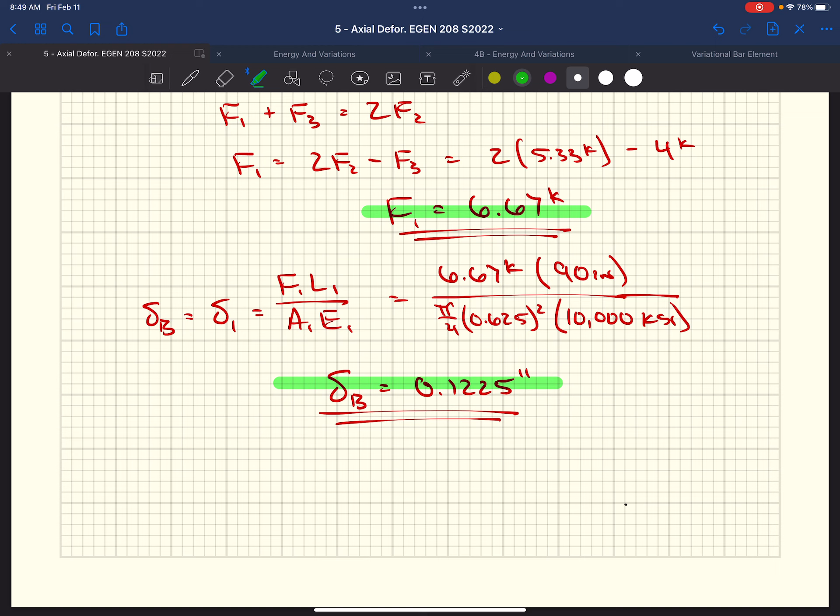Why is the displacement of B the same as the displacement of 1? Because B is at the end of rod 1. Oh, I'm sorry, I was looking at the distance being... Oh yeah, sorry, yep, okay, yes. Yep, that's why.

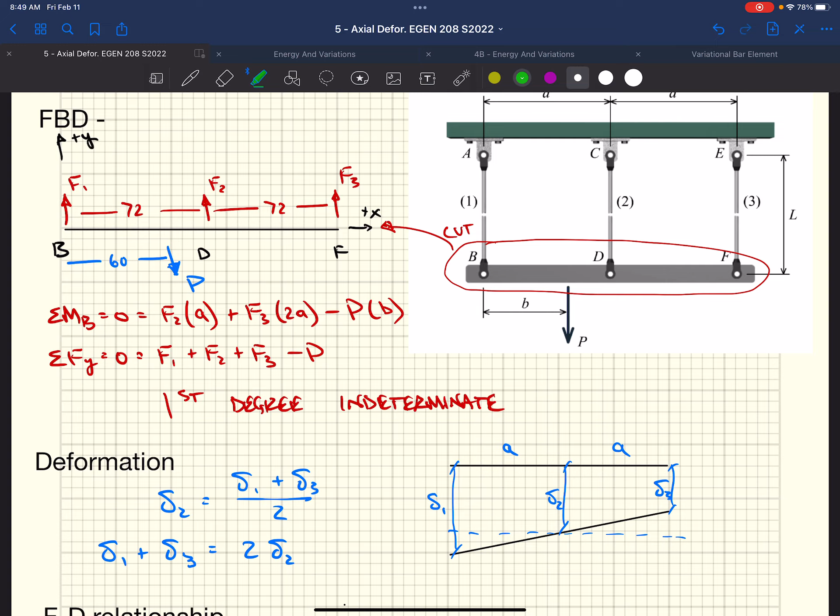Any other questions? So, on a test, if you have the 3 equations and the 3 unknowns, can we just plug that into our calculator, or do you want us to show work? You can plug it in your calculator. I would probably just set up the 3, and then you can make the jump, you don't have to solve for one into the other and then back and forth. But if you had all 3 equations written out correctly, and then you get the 3 answers correctly, I'd say you're good. The only reason I propose doing more work on paper is for partial credit, in case you did make a mistake somewhere. It's easier to follow.